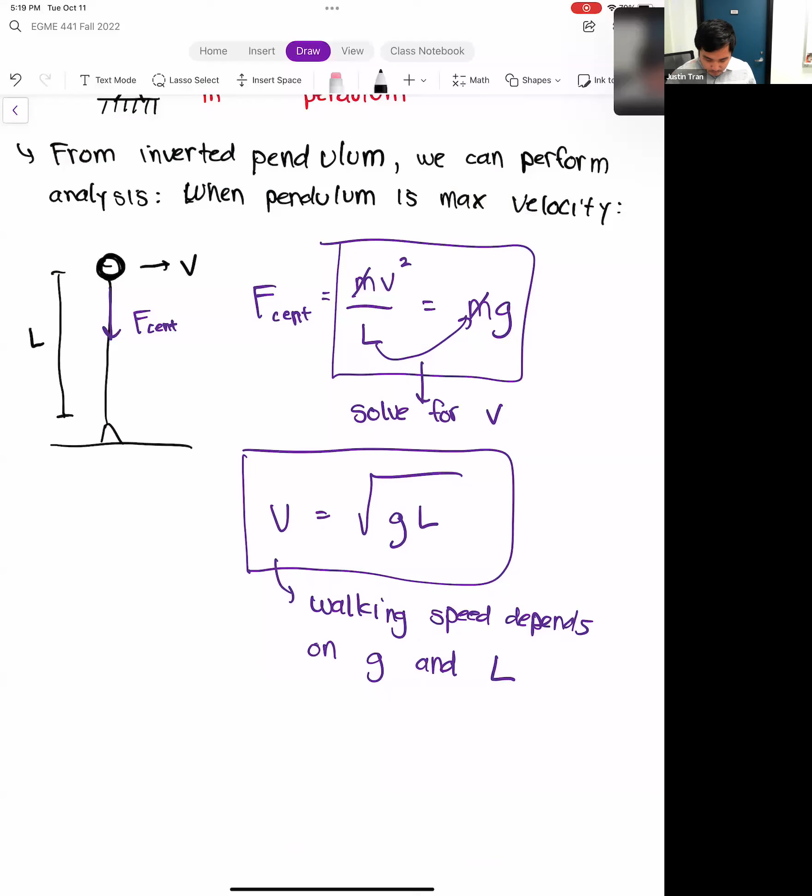Yeah, so these are, I don't mind. It's okay, I really...

You didn't mention it, so I assumed I'd seen it. Did Ricky say it was kind of slacking on you? No, yeah, was Ricky slacking in your group? Straight off, I want to say something about that.

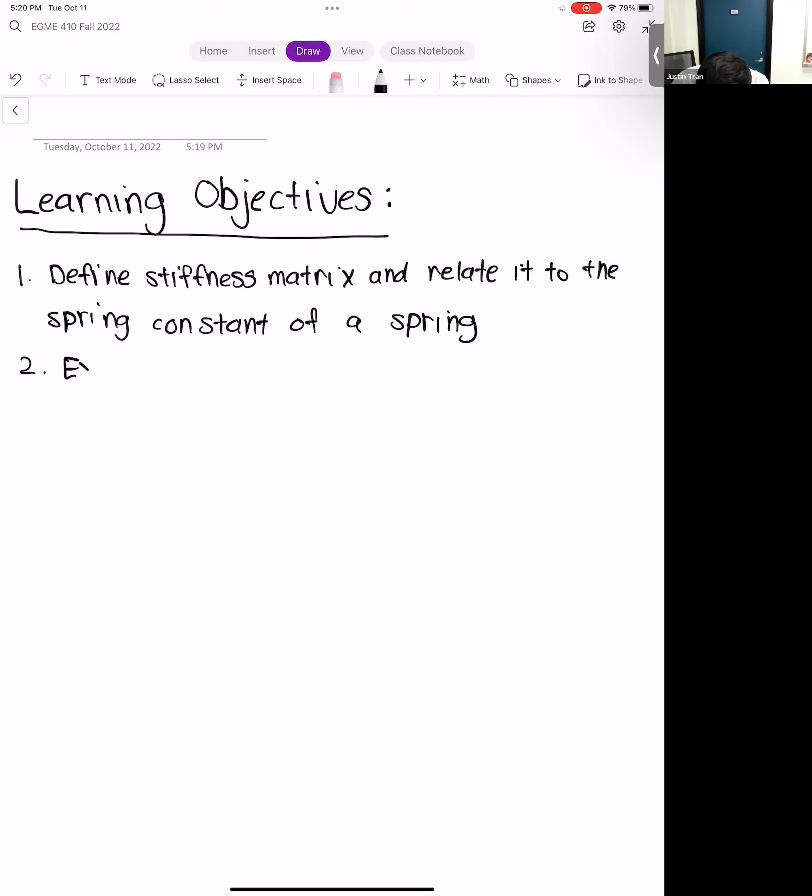Well, you're also in the engineering chat. Ricky and I are kind of... Hey, I wasn't saying that. It's gonna be pretty good, though. You sound kind of sick.

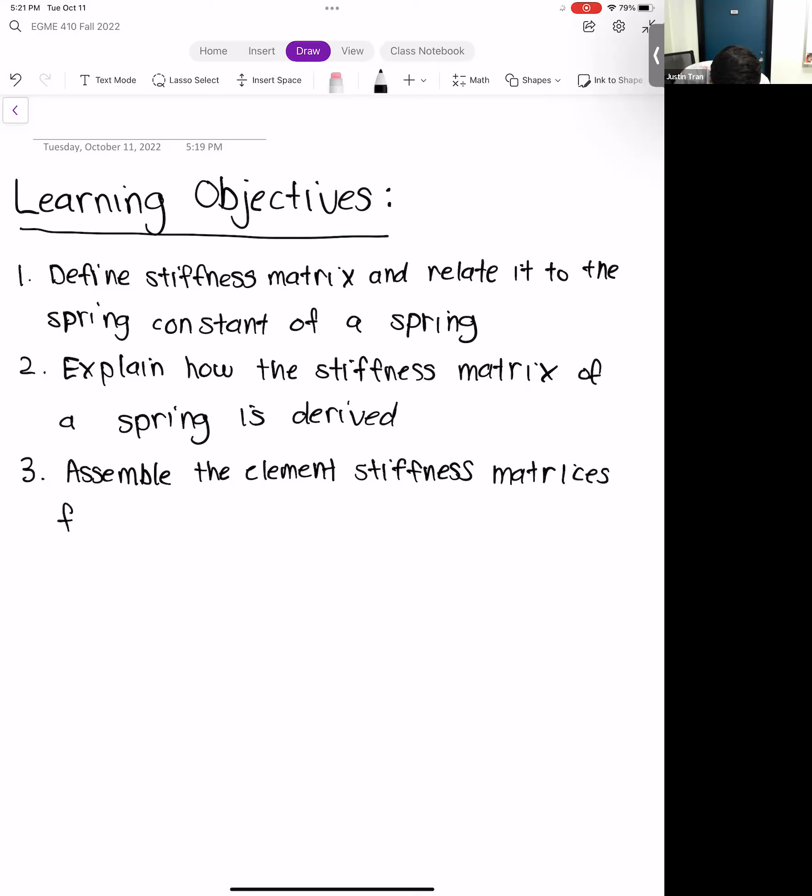Hey Charles, how's it going? Yep, what's up?

So I'm doing an assignment and I don't know where the mistake happened. You want to know the best... was it when he gave the mechanical, or was it when I turned stuff into beams? But I remember connecting the rod. You said we had to connect the rod to the beam, right? Yep, so it's supposed to be like this.

However, I ran my simulation and he was like, alright, I'll give you the extension, and it ended up like this. It looked like the beams just... I'm like, no, what is it? It went into the rod, like halfway through.

Oh okay, if it's just visual, that's fine. Are you seeing the deformation kind of maximize down here and then go like... no, I just generated the mesh, I haven't put any forces on it yet. Okay yeah, if it's just like this, it's just a visual thing.

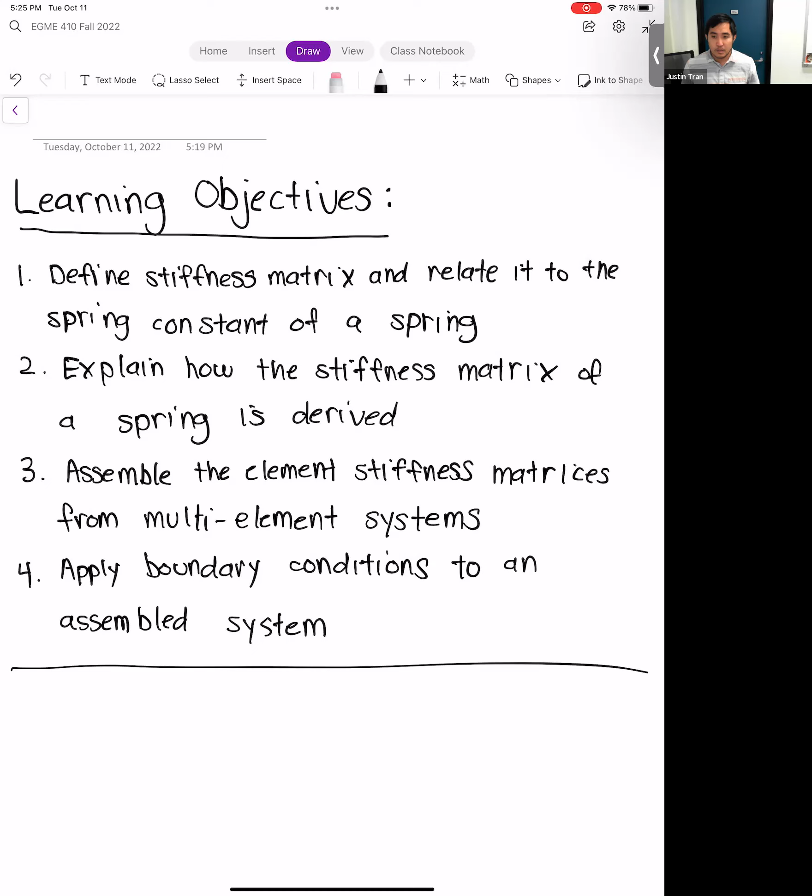That's good, it's good that you're thinking about some real numbers for these.

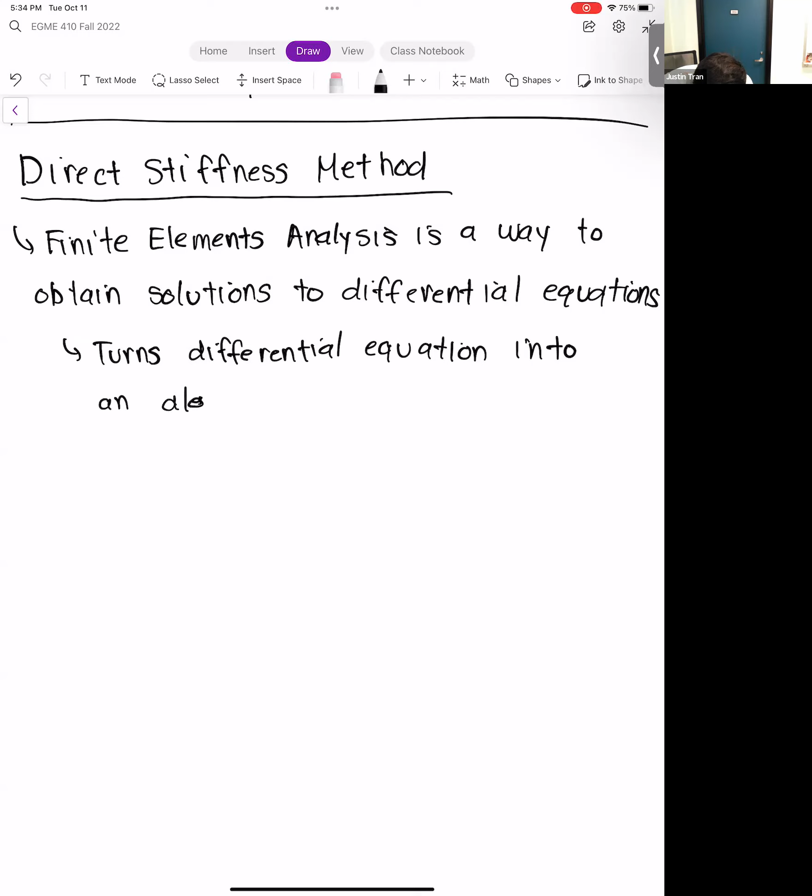At its core, FEA doesn't actually solve the problem for you. All it really does is take one problem and put it in a different form. Finite elements doesn't give you a solution to a differential equation, it just puts it in a much easier form to deal with. So finite elements is just the methodology to go from a differential equation to an algebra problem, and then you solve the algebra problem. Generally it's a lot easier to solve an algebra problem, especially for a computer, than differential equations.

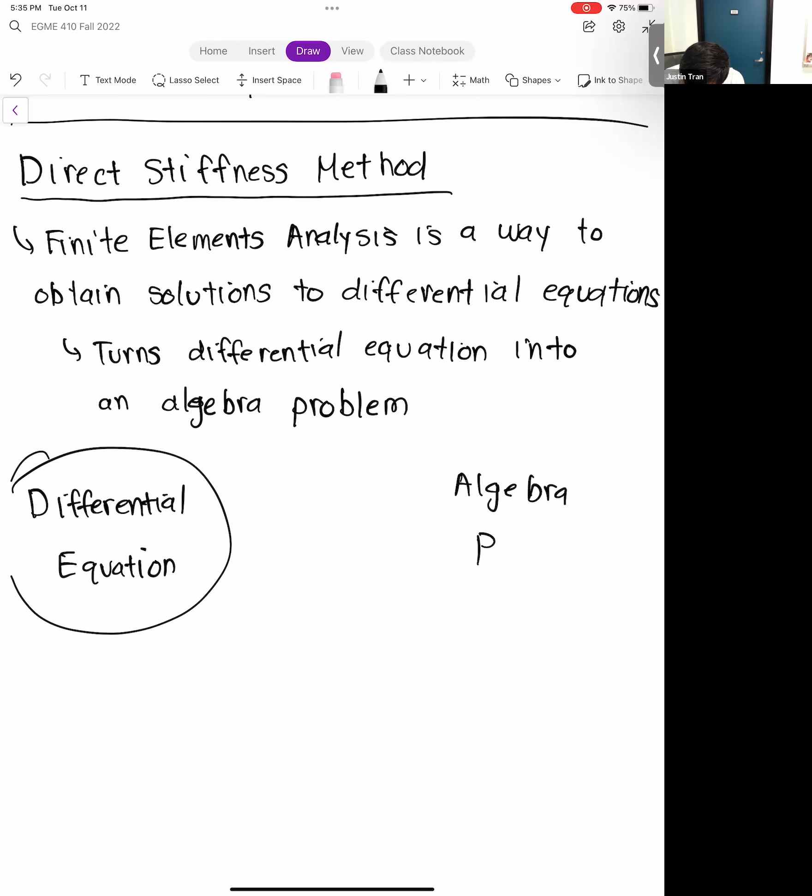Visually, it looks something like this: you start with a differential equation, and then you go to an algebra problem, and in between, that's FEA. Then from the algebra problem, you just solve it. I make that step sound simple because algebra is easier than differential equations, but it can still be really hard. Over the next couple weeks doing the theory, you'll look at the algebra problems we're getting and say that's not easier, that's harder. Algebra is not necessarily easier for a human, but it is a lot easier for a computer. So if you can turn a differential equation into an algebra problem, the computer is much better equipped to handle that.

This FEA step of turning a differential equation into an algebra problem - there's lots of different ways to do this. There's lots of different ways to skin the cat. Even though we talk about FEA as if it's one thing, there are actually lots of different ways you can perform FEA. There are lots of different FEA implementations out there.

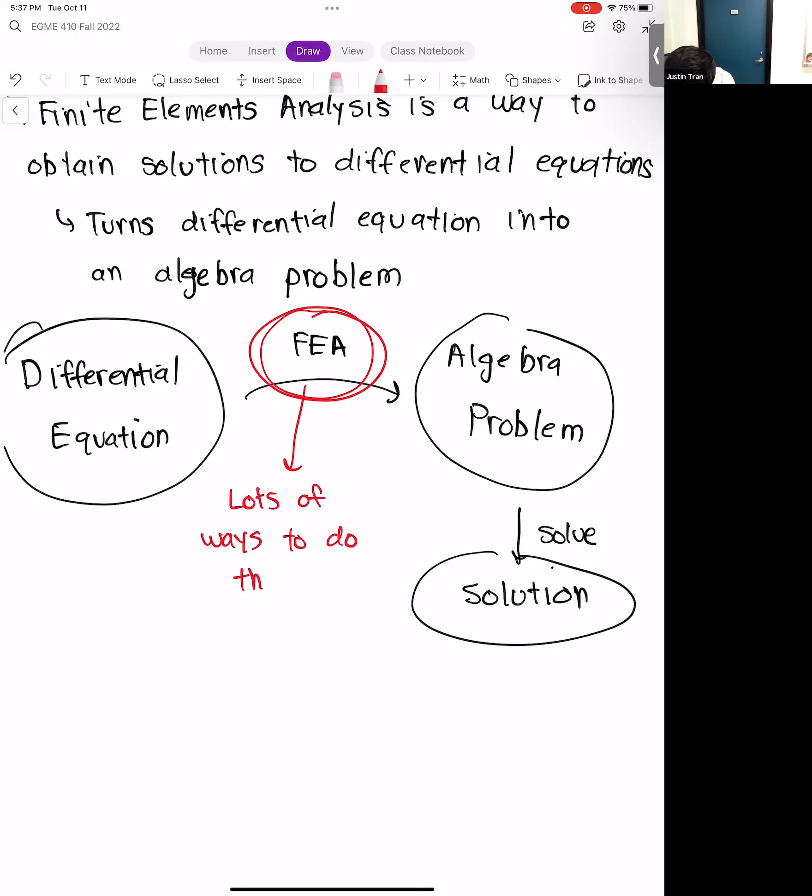The reason I'm bringing that up is that the direct stiffness method I'm going to teach you is not really all that similar to what ANSYS is doing. The direct stiffness method is just one way to perform FEA. It's not very practical for real life problems because it's very simplified. But I teach it because traditionally it's the first method most people learn when learning FEA theory, so it's a lot simpler to digest. Even in its simplicity, it still gives you a lot of good insights into how the finite element process works on a theoretical and algorithmic level.

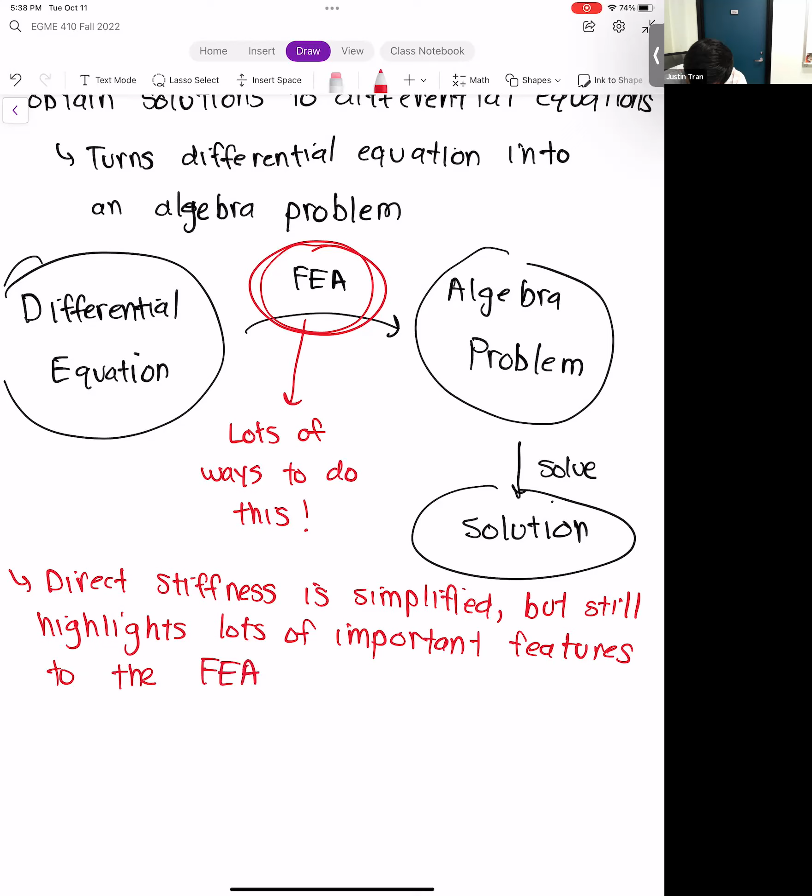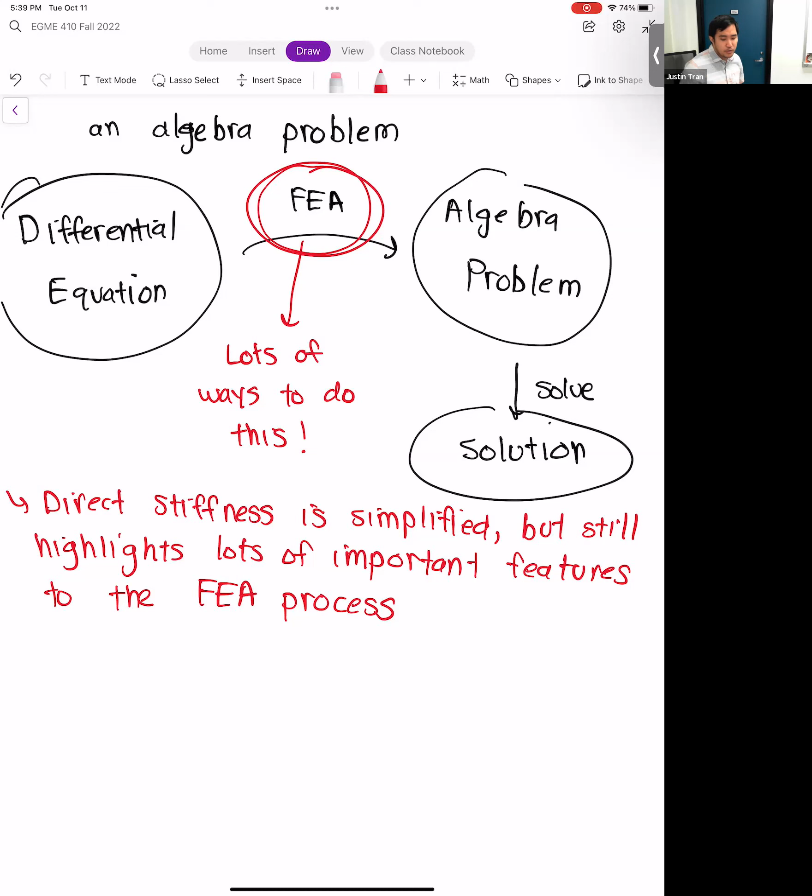I would argue that most of the direct stiffness method is actually the same as normal FEA, like what ANSYS is doing. There's just one key step that's different. Of course, that key step is one that a lot of FEA algorithms are built on, so it's a really important step, but all the other steps are mostly the same. I think I've done enough teasing.

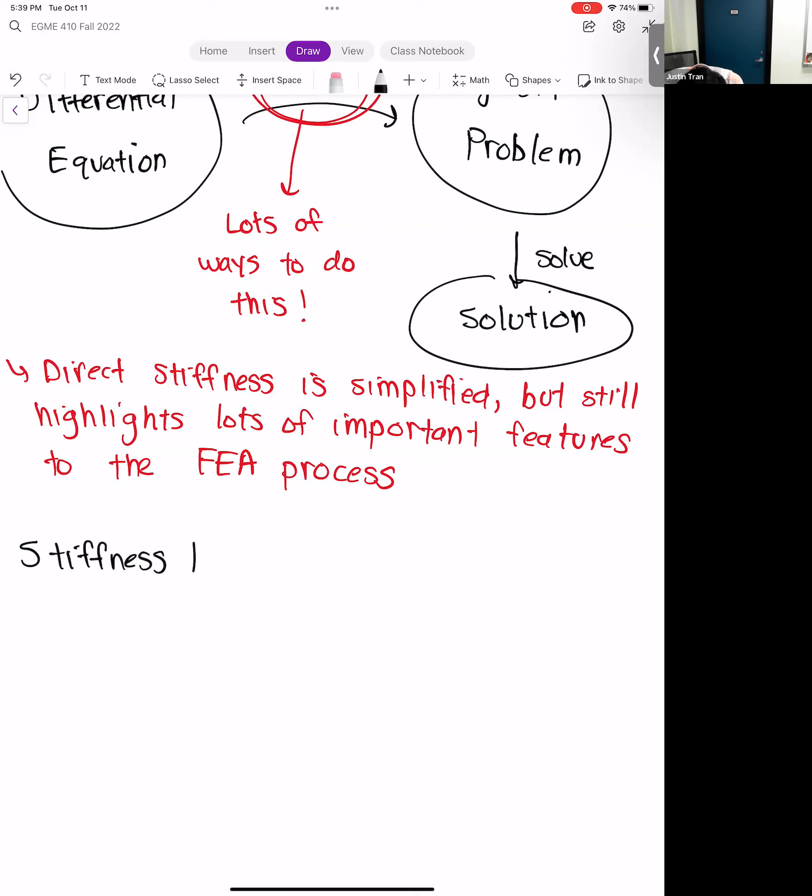Let's talk about what the direct stiffness method is by talking about something called the stiffness matrix. To introduce the stiffness matrix, I'm going to bring up an old friend - hopefully it's an old friend - and that's going to be a simple spring and Hooke's law.

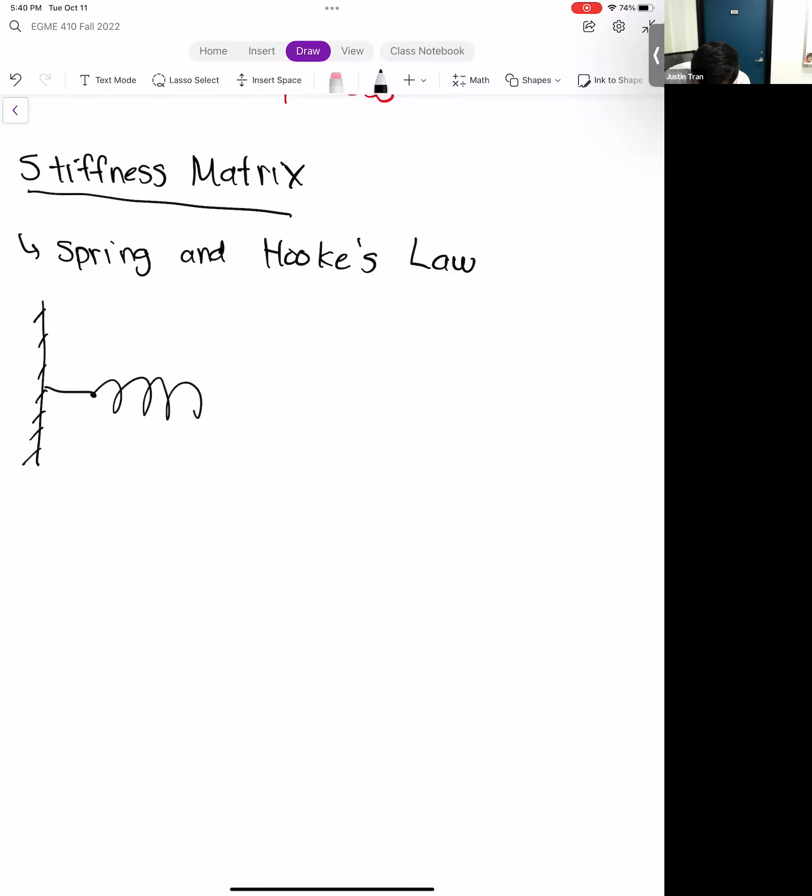Let's consider a simple spring. Here we have a fixed wall, and we have a spring attached to the wall, because why not. Let's say we're going to pull on the spring with the force F. We know the spring has a spring constant K, and the units for K are newtons per meter, at least in SI. That's the spring constant, so that tells us how strong the spring is. The spring also has a default length, L. But when we apply the force F on it, the spring is going to extend. This D here is the amount the spring is stretching in response to the applied force.

From this simple spring, we can form Hooke's law. Hooke's law gives us the mathematical relationship between the amount of force we're applying on the spring, its deformation, and its spring constant. Hooke's law basically says the force F that we apply on the spring - and I'm writing this obnoxiously large so I can draw side notes, but you don't have to draw it as large as me - the force F is equal to the spring constant K multiplied by the deformation.

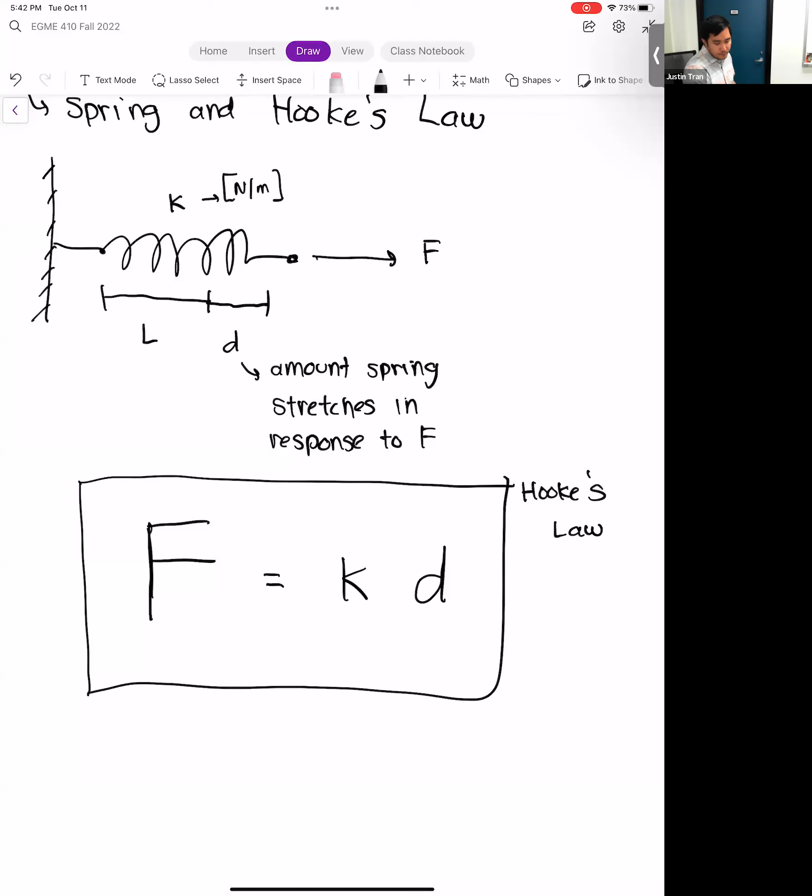So hopefully that's a formula that you're familiar with. It's a very simple formula, right? It's only 3 terms, and we just have a simple multiplication. But believe it or not, this simple formula here kind of forms the basis for how we form FEA

problems, and I'm going to show you kind of what that looks like. So first thing I'm going to do is go term by term here and talk a bit more in depth about what that term represents. First of all, what it represents for the spring, but also how we can generalize that relationship to any other system.

So let's start with the force F here. This force F is what I would consider an external force. It's some kind of external entity that is acting on the spring that's causing it to react.

That force F is not produced by the spring itself. It's either some external device, external person, or external thing. So that F has to be from external. And what you'll notice is that the F is kind of sitting on one side of the equation all by itself. We have the equal sign, and everything else in the system is on the right, but the F is kind of chilling by itself on the left. And that's going to be an important point that we'll come back to a bit later too.

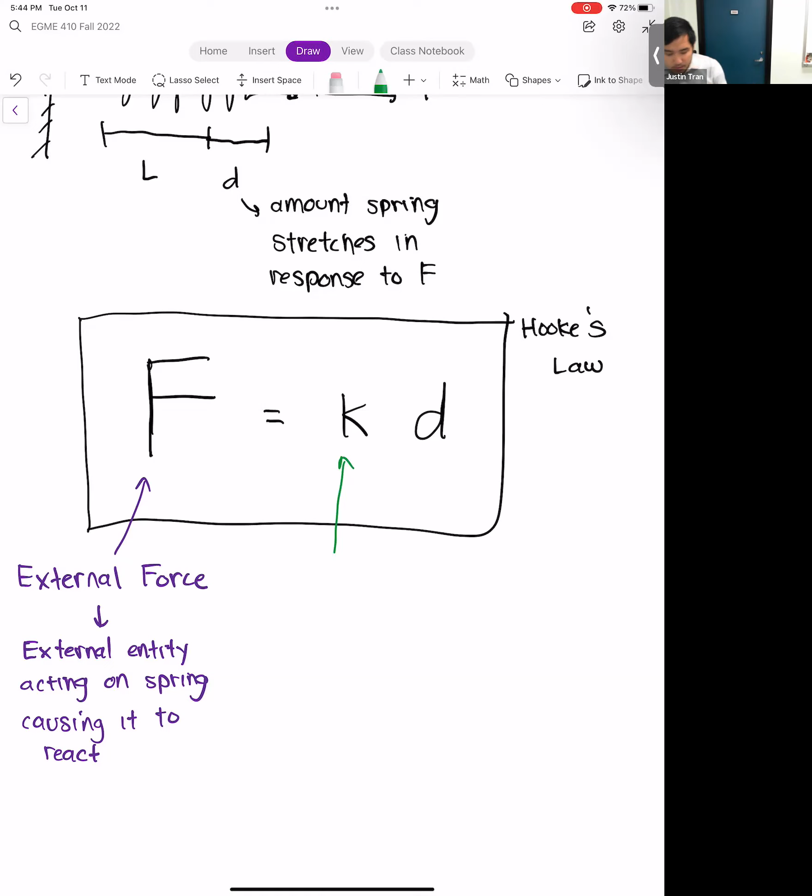Next we have K. Of course, K here is the spring constant for the spring. And the spring constant is something that I would characterize as a material property or material constant of the subject.

We know that if we're looking at a spring, the higher the spring constant is, the more it's going to resist deformation. So a spring with a very high spring constant is going to resist it a lot, and springs with a low spring constant will just kind of be like a slinky, basically. In other words, the value of this property basically defines how the system is going to react to the external factors.

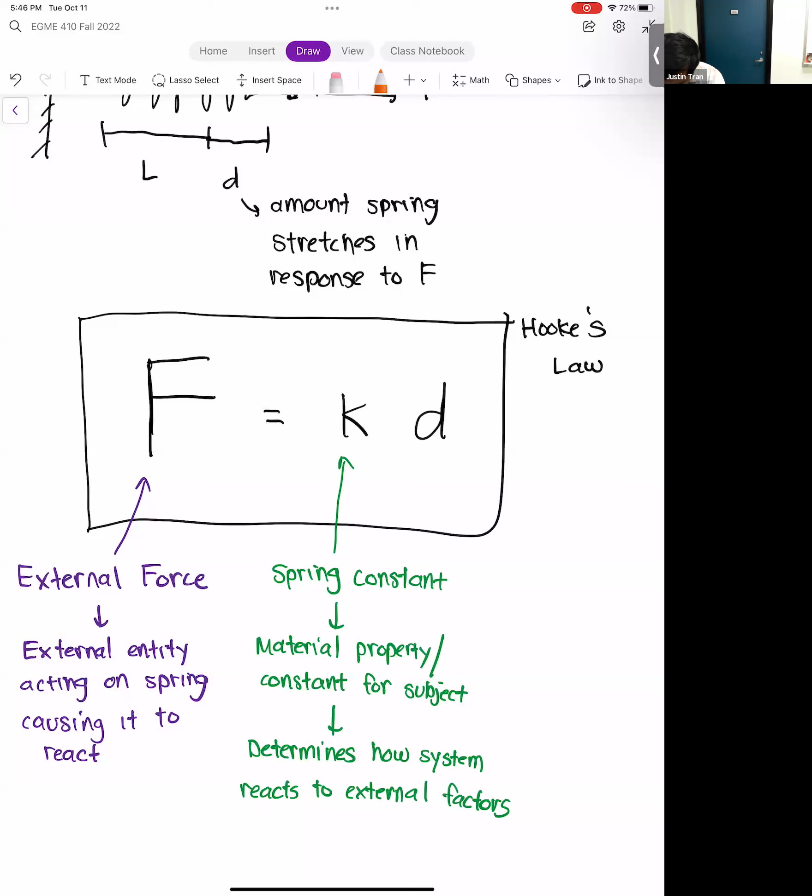And then finally we have D. D, of course, is the amount that the spring is deforming.

Another way that we can view this D here, if we extrapolate and look more broadly, is this is the system's response to the external force. So if the spring constant is the material property that determines how the system will react, the D there is the actual response.

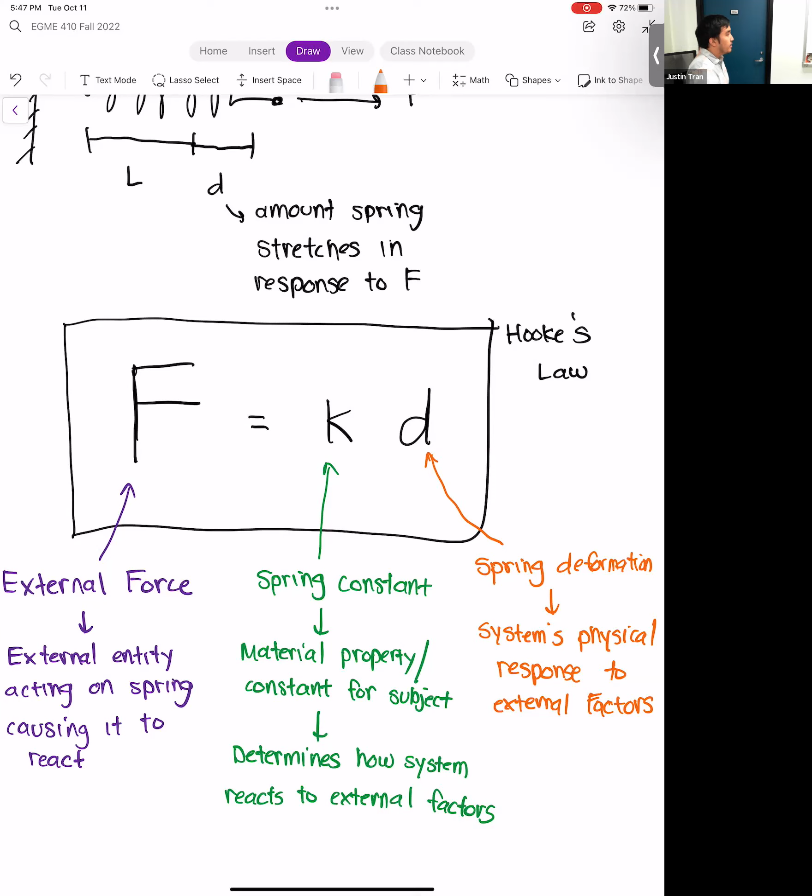Because anytime you have any kind of external effect on a system, then it's going to react in a certain way. So the D there kind of characterizes the response.

And so, even though we have a simple equation here, there's kind of a lot of really rich information that we can pull from it. If you notice, a lot of how I've been describing these terms are kind of consistent with how we've been describing a lot of our finite element stuff. For instance, the force F here, we know that's some kind of external effect or external force. So what's the concept in ANSYS that we've been looking at that acts as an external force? Right, these are like our boundary conditions.

Next, let's look at K. I said K there, it's already in the name - I already said it's like a material property or material constant. We know from our ANSYS activities that constants like the Young's modulus, like the density, those are going to affect the response. So these are just like the material properties.

Another thing I'm going to throw in here because it's relevant to our discussion is the geometry as well. A spring doesn't have any geometrical properties, but for other FEA, the geometry is going to be there. The size, the area, the lengths, and stuff like that of your system is going to have basically the same effect as K.

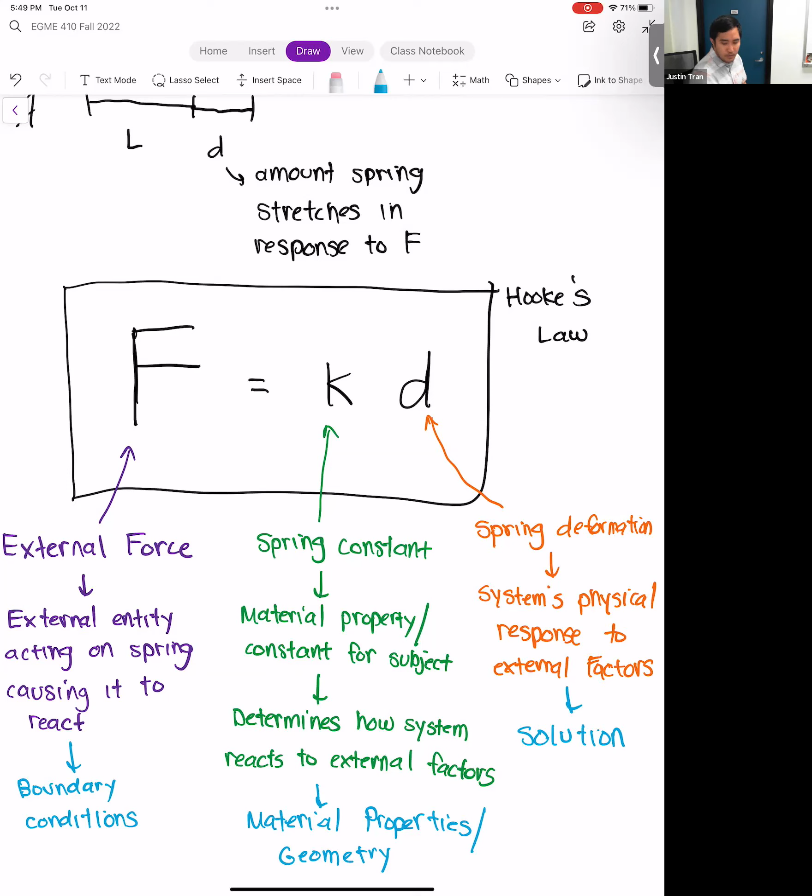We have a very simple Hooke's law equation here, three terms, but there are so many parallels to how we understand finite elements. This system is actually going to be the basis of our theory. In particular, we're going to focus on this K right here. One way to think of it is that it's kind of like the stiffness constant of the spring. But when you extrapolate this and apply it to a finite element mesh with tons of different nodes, instead of a constant, what you're going to have instead is a matrix.

That's going to be the focus of a lot of our theory: what the stiffness matrix is, what it represents, and how we actually use this in computations. As we go through the theory over the next couple of weeks, we'll see a lot of different expressions for stiffness matrices for different types of structures. One constant you'll see is that the stiffness matrix always contains things like material and geometric properties of the system.

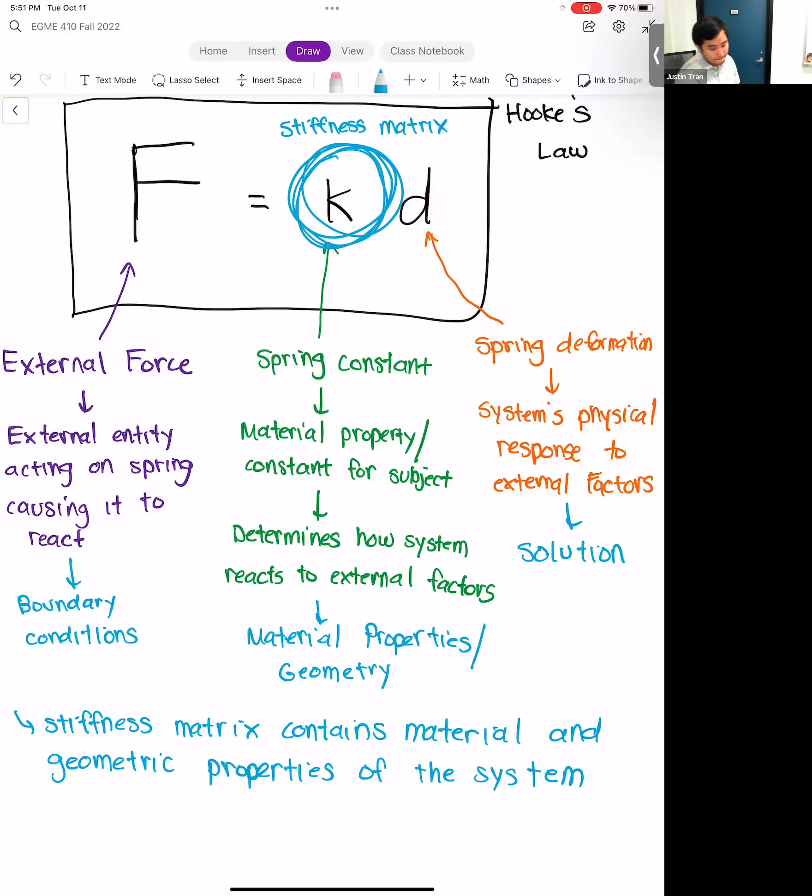This structure here is not just limited to structural mechanics. If you look at FEA for heat transfer or FEA for fluids, you have the exact same structure: external effects, important material parameters, and the response, except the specific values of these change. For heat transfer, the response is temperature, and the material constant is things like thermal conductivity and thermal diffusivity. But the same idea stands: the external force equals material constants multiplied by the response. This basic structure is used for basically all of finite elements.

Any questions on this?

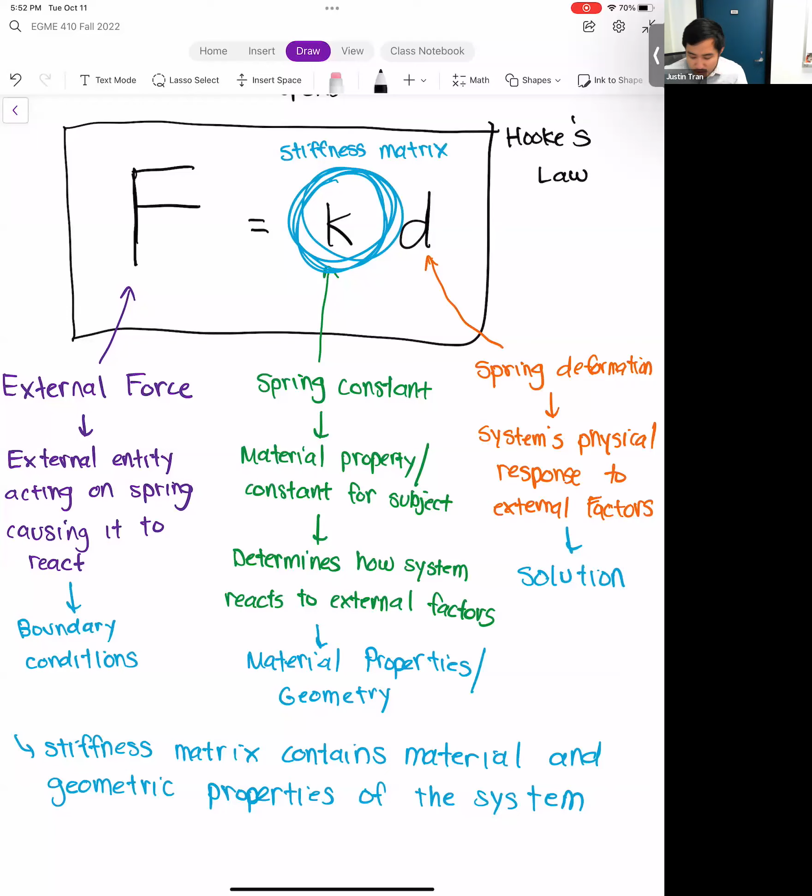Let's take the structure here and apply it to the spring, and let's see if we can get the stiffness matrix for a spring. A matrix implies that if K is a matrix, then in order for that relationship to hold, the F and D terms have to be vectors.

Particularly, we're going to look at a spring and consider the two edges of the spring. We're going to consider one side like this, F1, F2, with node 1 on the left and node 2 on the right. In response, we're going to look at their corresponding deformation, so we have D1, D2. What we want is an algebraic relationship that relates F1 and F2 to D1 and D2.

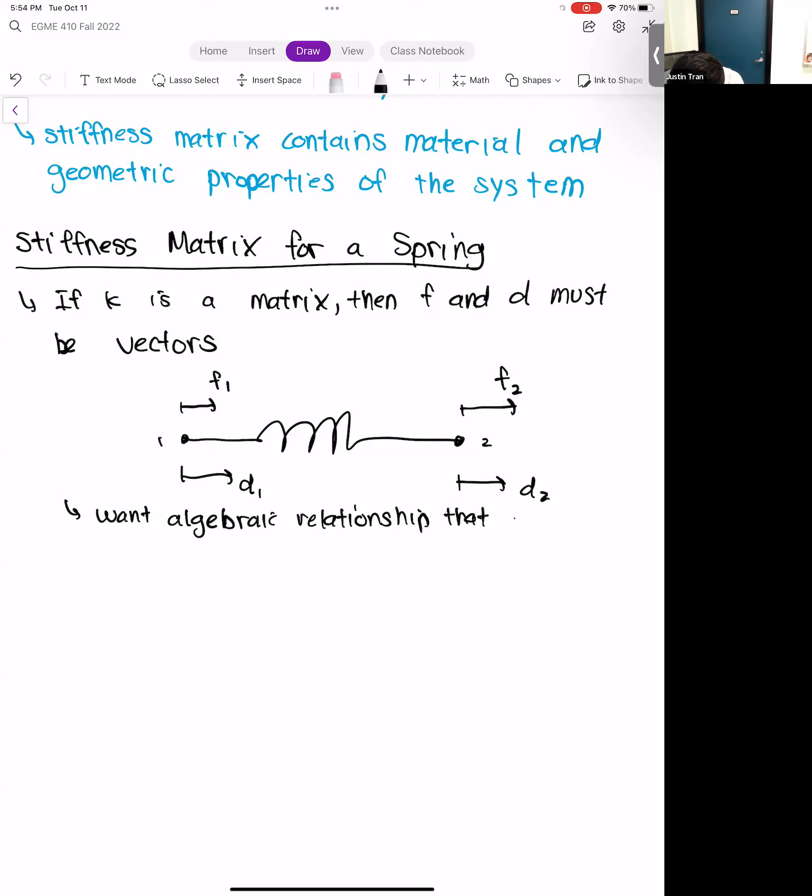The spring has a spring constant of K. Using that same structure we had above, if we isolate the forces on the left-hand side, we have F1, F2 as a vector, and this is going to be related to D1, D2, which is also a vector. In order to make this algebraically sound, our stiffness matrix here needs to be 2 by 2, so we need to have K11, K12, K21, K22. This is a very simple stiffness matrix or stiffness system for a spring. What we're aiming for is to find the values of this stiffness matrix.

Okay, so let's go ahead and begin. The first thing we're going to assume here, just for simplicity's sake, is that our spring is in static equilibrium.

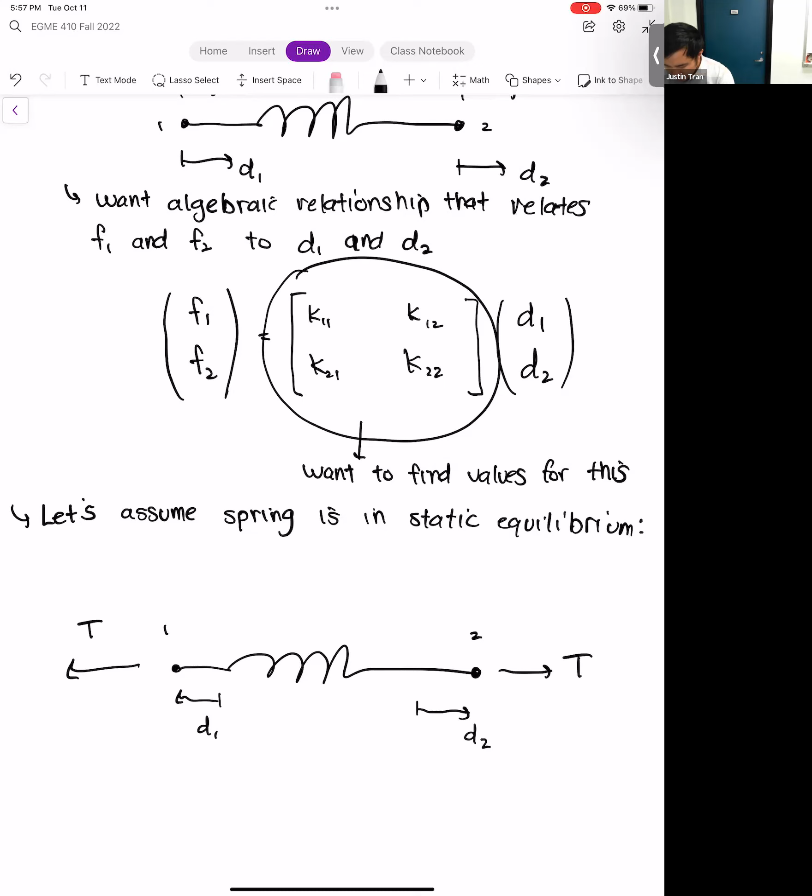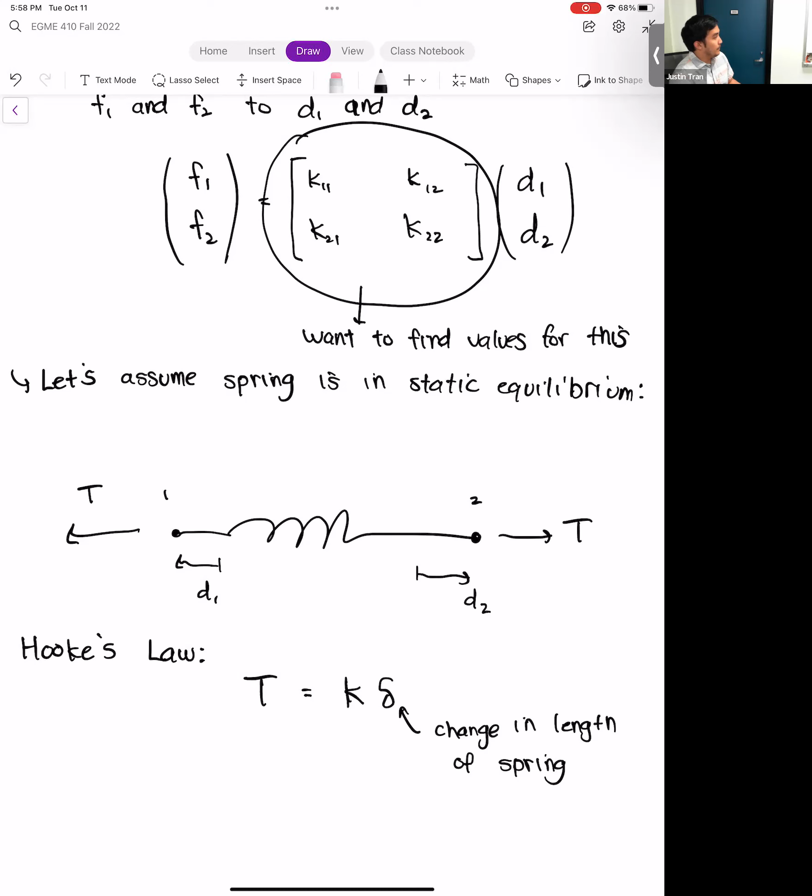So let's form Hooke's law for the spring. Hooke's law basically says that the force we apply on the spring, which is T, is equal to the spring constant multiplied by its deformation. Its deformation here is going to be its change in length, delta, which is going to be the change in length of the spring. So that's just straight up Hooke's law on its own.

First, I'm going to take that term delta and put it in terms of the nodal displacements, because we don't have delta in our figure, but we do have our D1 and D2. So I'm going to replace this. We have T, which is equal to K. One way we can compute the change in length is we just take the difference between D1 and D2, because we know D2 is deforming to the right, or node 2 is deforming to the right, and node 1 is deforming to the left. So if we take the difference between those deformations, that's going to be the change in length. So this is going to be K times D2 minus D1.

So we have this relationship here where the tensile force on the spring has to equal the spring constant times D2 minus D1.

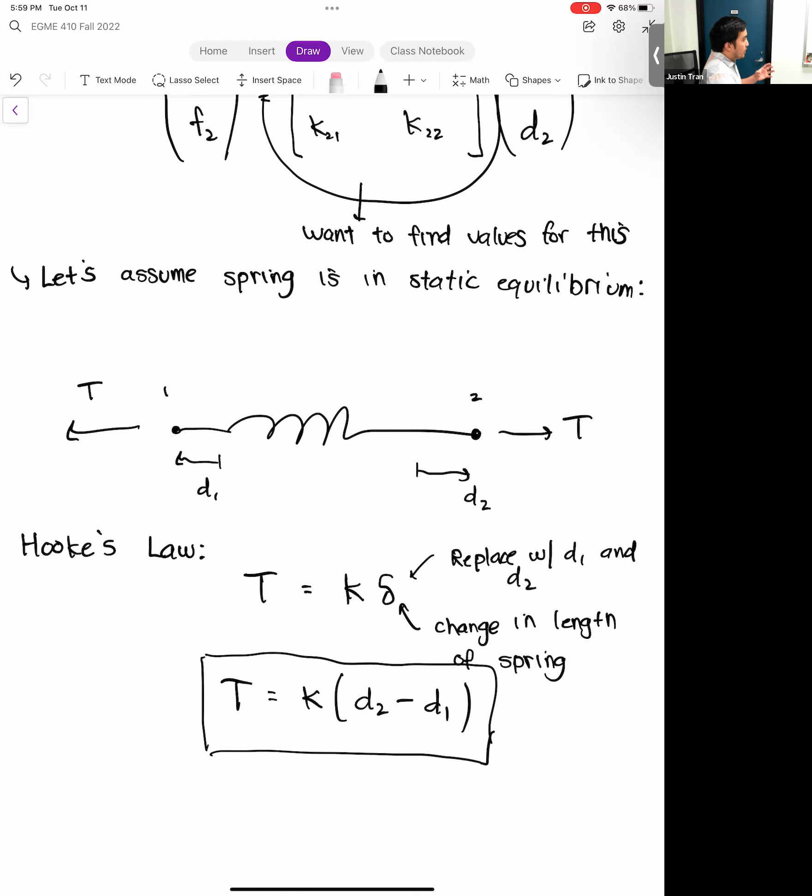Now that we have this expression that relates the tension to D1, D2, let's relate the tension T to F1, F2.

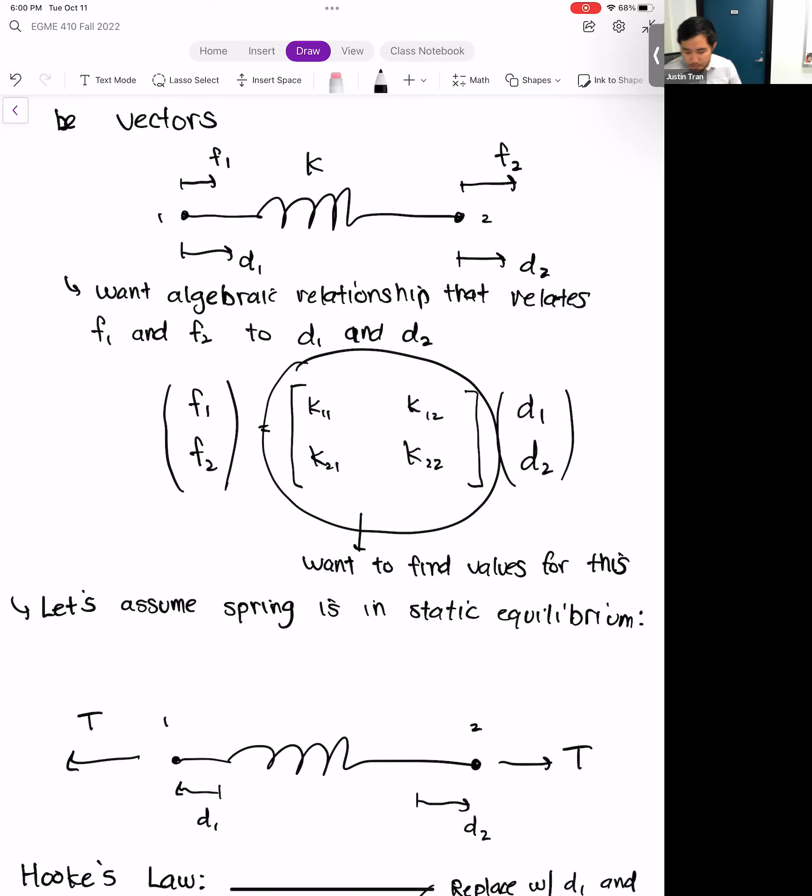By F1, F2, what I mean are the external forces being applied on node 1, node 2. If we go back to our first figure, we can see that F1 is acting on node 1 pointing to the right, and F2 is acting on node 2 pointing to the right as well. If we compare this figure to this one, we have tensile forces T acting on nodes 1 and 2, so we can make a relationship between F1, F2, and T.

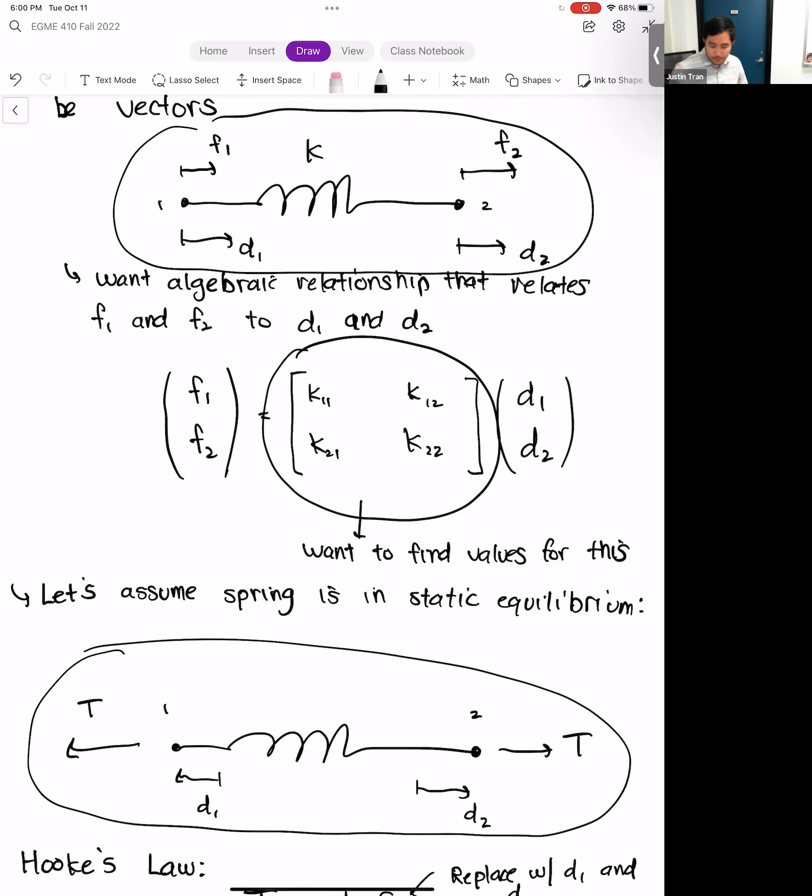In particular, we have this relationship: F1 is equal to minus T, because at node 1 we have the tensile force pointing to the left, which is the negative direction. So F1 is equal to minus T. And F2 here is going to equal positive T, because on node 2 we have the tensile force T pointing to the right, which is the positive direction.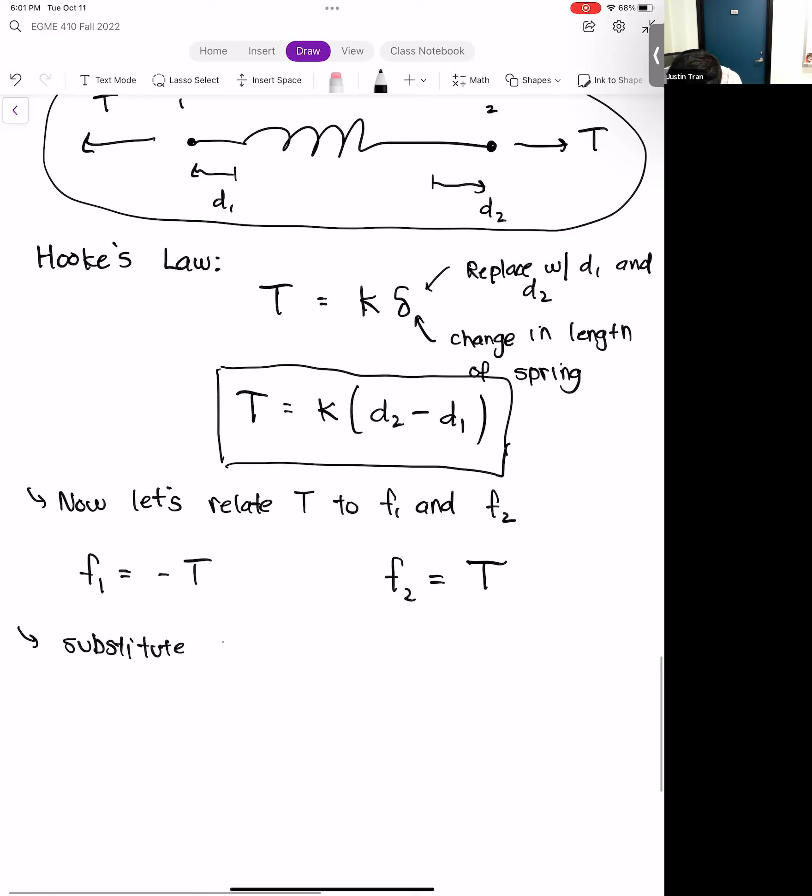The next step is we can take these expressions and substitute for T. We know F1 is minus T, so F1 is equal to minus K times D2 minus D1, and F2 is equal just to T, so that's equal to K times D2 minus D1. Just for simplicity's sake, I'm going to distribute the negative for F1, so it's going to be K times D1 minus D2.

And so in the end, we have two equations here: F1 is equal to K times D1 minus D2, and F2 is equal to K times D2 minus D1.

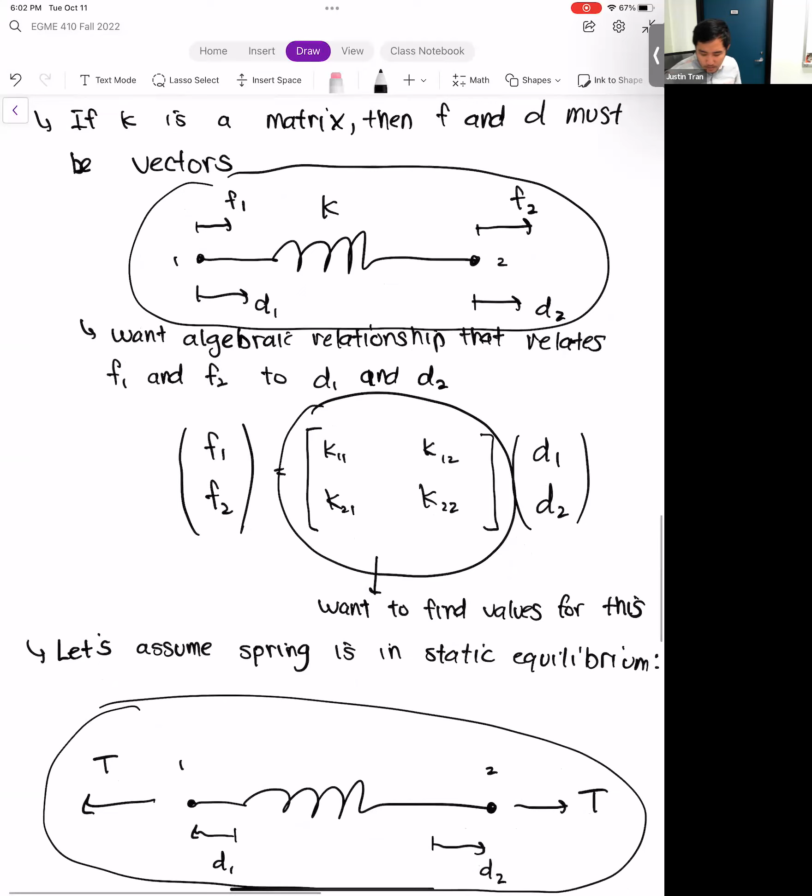So these two equations are significant because remember what we were looking for when we first started this section. We wanted a system of equations that related F1 and F2 to D1, D2. And look what we have here—we have two equations and they provide the relationships exactly as we want.

So we have F1 is equal to K times D1 minus D2. And then we have F2 is equal to K times D2 minus D1. We have two equations that form this relationship for us.

And so the last step I can do here is put this in matrix form. In other words, I'm going to form a vector here. So we have F1, F2. This is equal to a matrix multiplied by the D1, D2 vector.

The last thing we need to do is fill in the entries of that matrix based on the two equations we have above. If we look at the two equations, we know the coefficient for this part is going to be a positive K. The coefficient in the upper right is going to be minus K, and the bottom left is going to be a minus K. And then the bottom right is going to be a positive K. So what we have here is the stiffness system for a two-node spring.

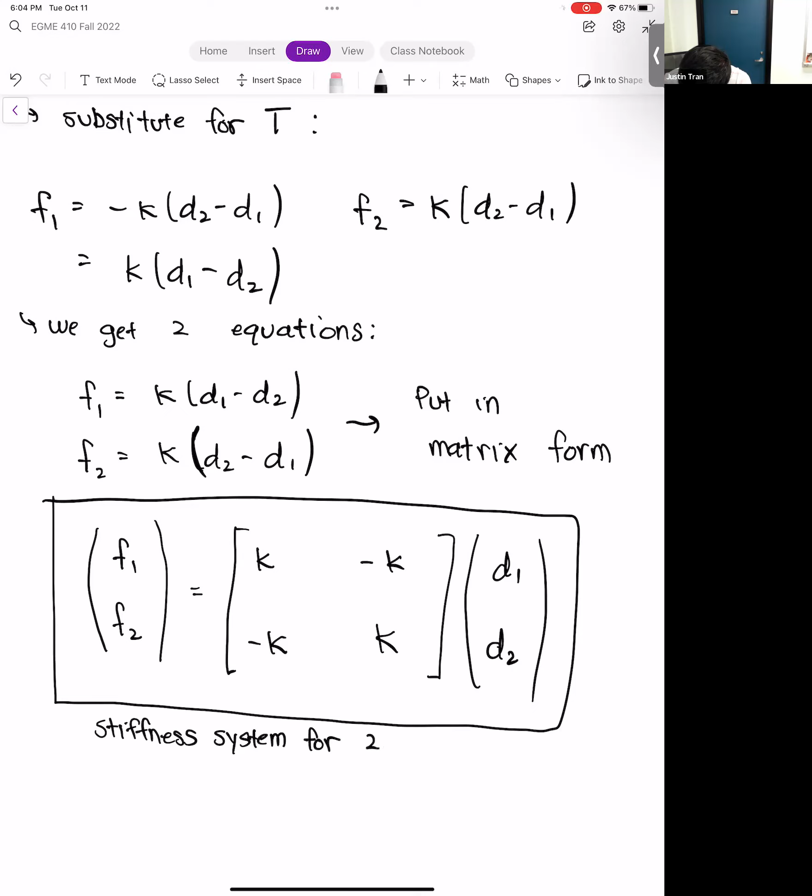In particular, I'm going to pull out this guy right here. So what we have here is K, a matrix of K, minus K, minus K, K. And what we call this right here is the element stiffness matrix for a spring element.

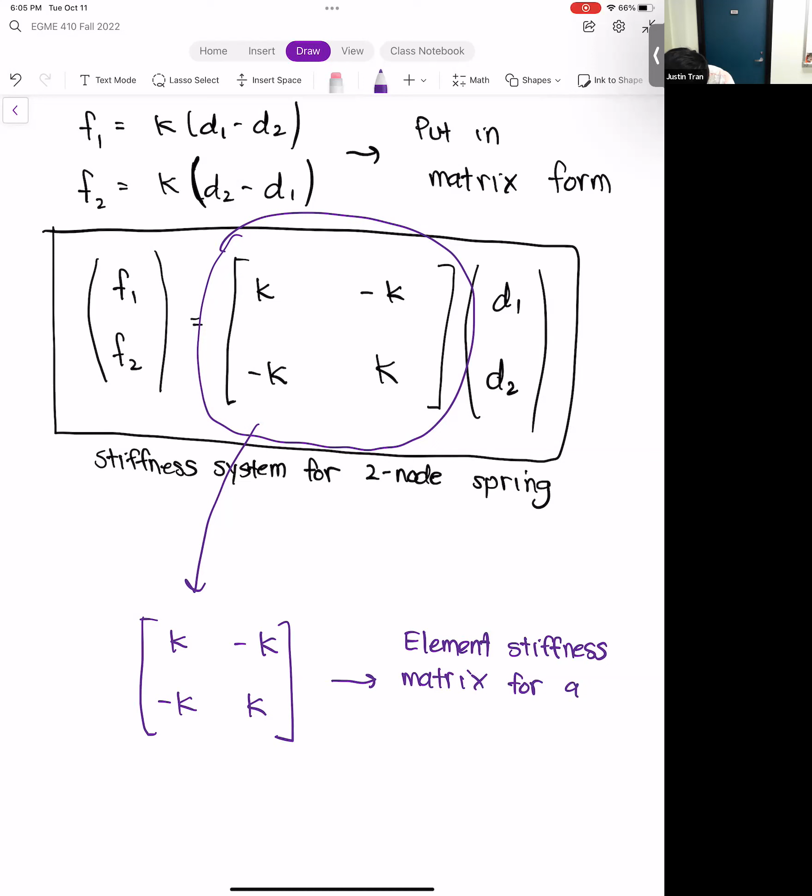So anytime that we have a spring, we can relate the external forces acting on the spring to the nodal deformations using this matrix right here.

Anytime that you have an element—and I use that term very deliberately—an element here is very analogous to an element that you have in ANSYS or any FEA. Every element in every kind of mesh is going to have an element stiffness matrix associated with it. And so this is probably the simplest element stiffness matrix known to man. You can't really get much simpler than this.

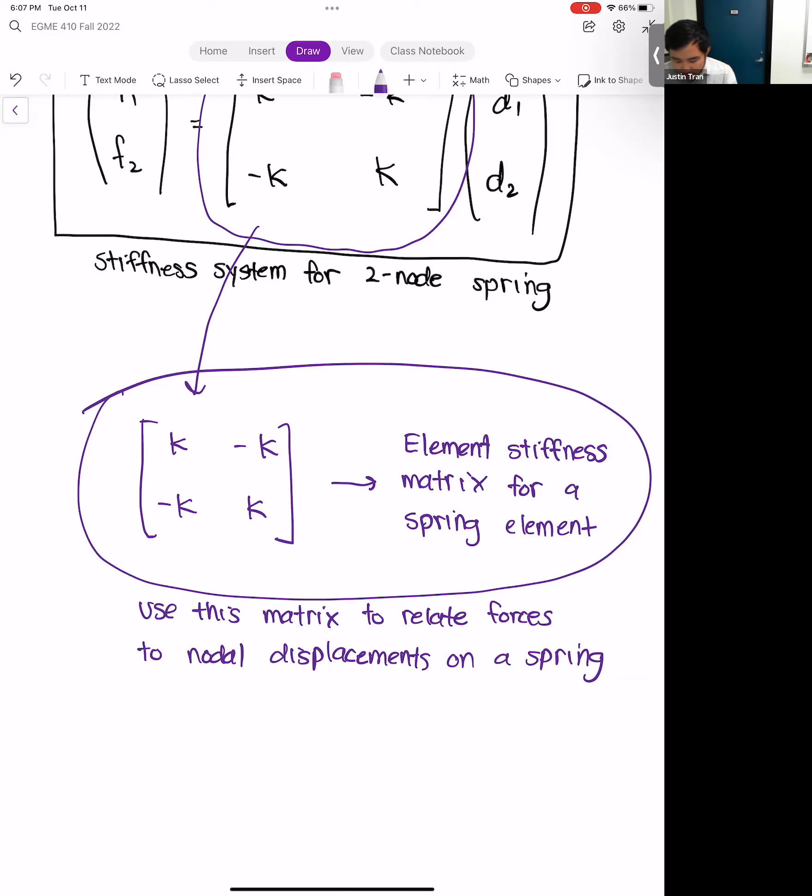All right, so we've looked at one element here and the element stiffness matrix for that, but the real power of FEA and this methodology in general is for multiple elements. Let's see how we actually deal with a multi-element system.

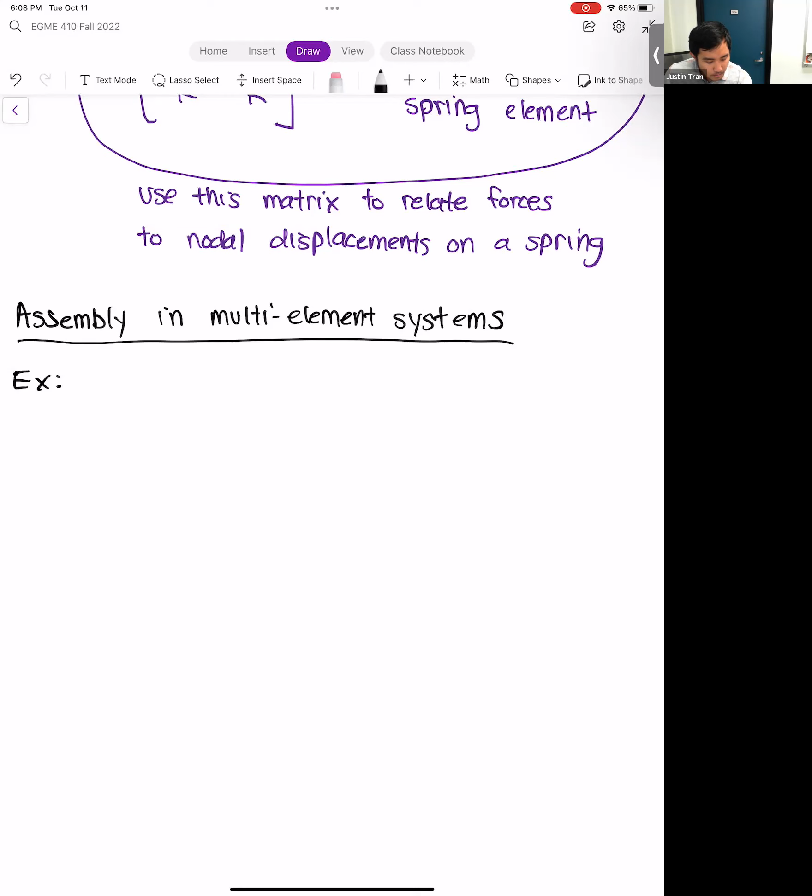I don't have it listed as an example, but this is basically going to be a long example. So let's consider two springs that are attached in series.

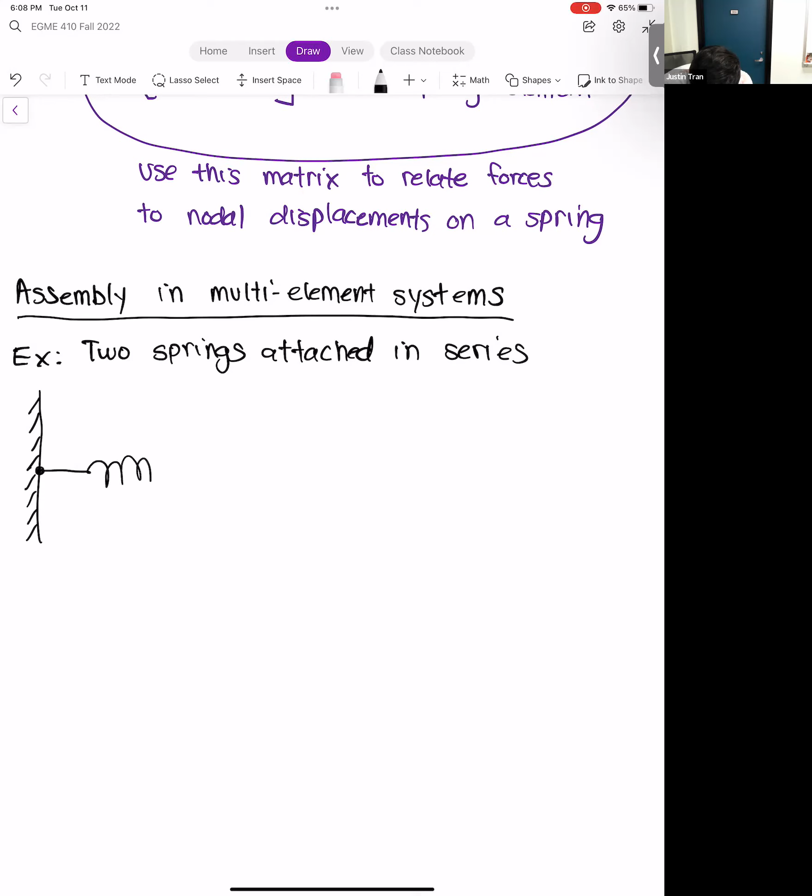We don't have to make any assumptions on the springs themselves, so we can assume they have different spring constants. The first spring has a constant Ka and the second spring has a spring constant Kb. We can label the nodes: in between the springs we're going to have the nodes of our system, and going from left to right we have node 1, then node 2, and node 3.

And then, of course, at each of the nodes we can compute the deformations of those nodes. The way we're going to track the system and solve it is by computing the deformations at each of those nodes: D1, D2, and D3.

Acting on this entire system is going to be an external force F—that's going to be our boundary condition, and you'll see how that F is factored into the equation later on. So what we want to do for this system is compute all the nodal deformations in the system: D1, D2, and D3.

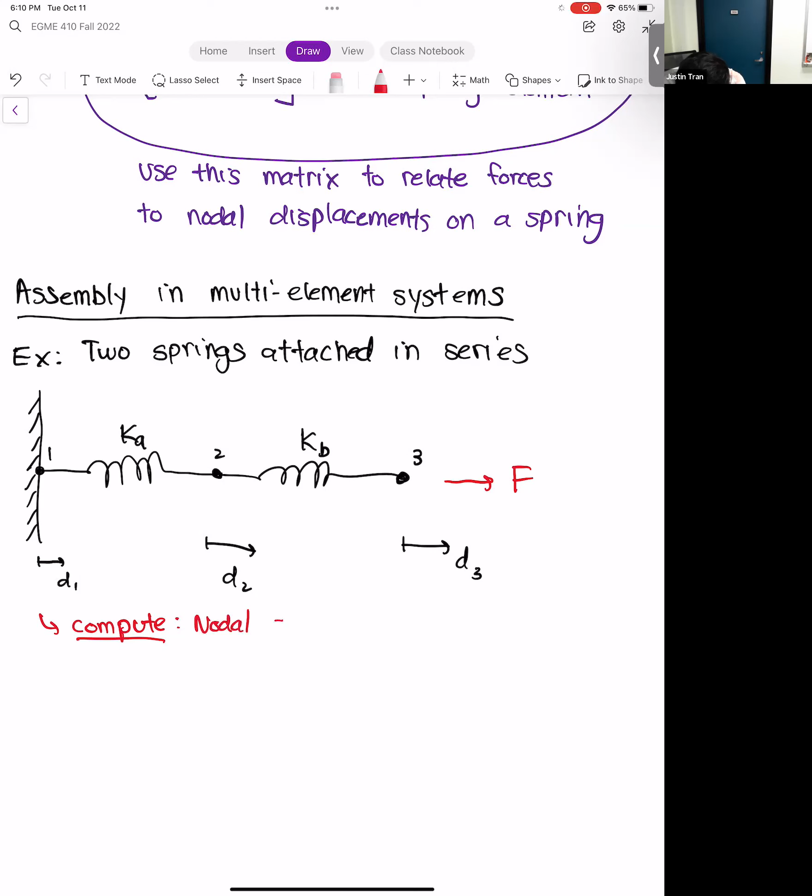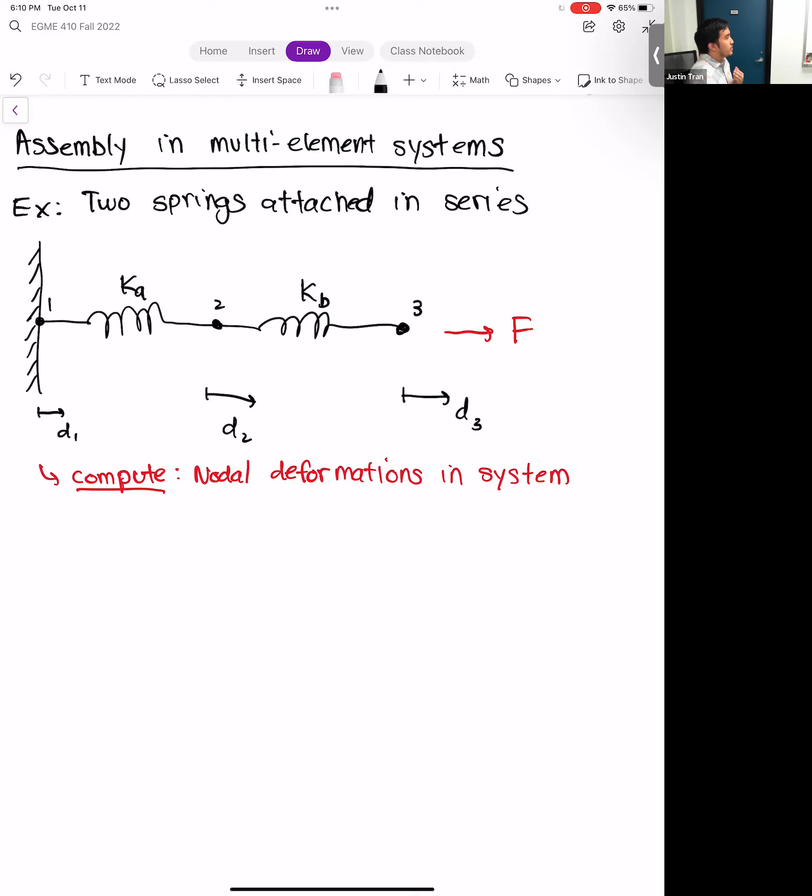So I've shown this problem a couple of years now, and some people have said they've learned how to do this in a different way in another class, and that's great. I'm not here to trash on anyone's teaching, only my own. What I'm going to show you here is the finite element way to do this, and it's going to utilize basically everything we've talked about today up to this point.

We're going to utilize element stiffness matrices, and we're going to form them for both element A and element B. And then we're going to see how we can actually combine them.

The first step to solving a multi-element system like this is to form the element stiffness matrices for all the elements in the system.

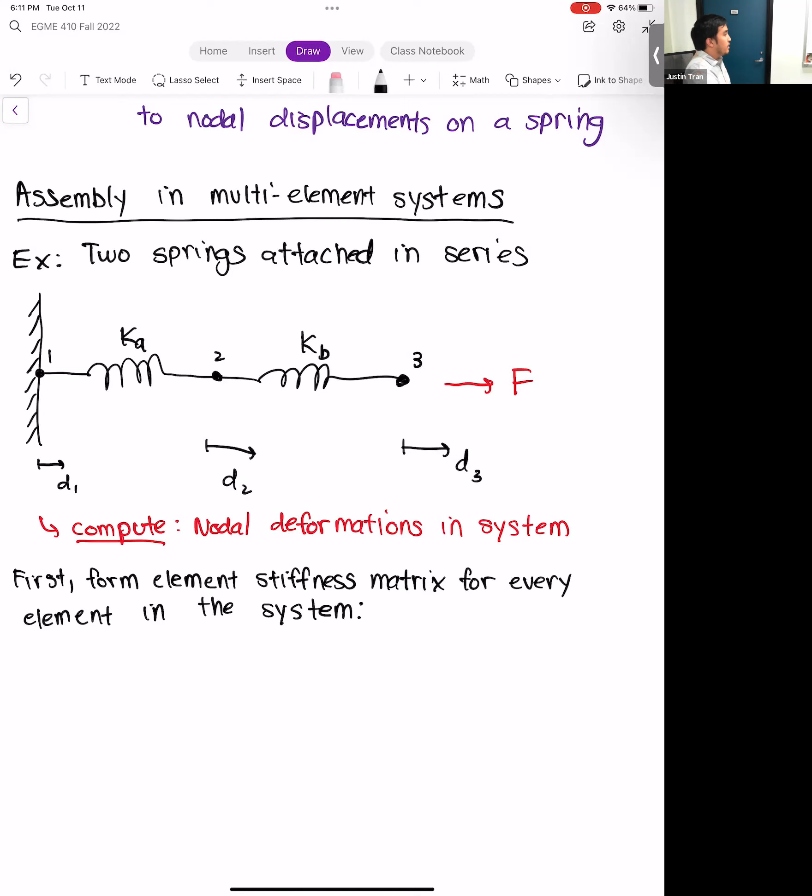Here we only have two elements, A and B, so we only have two element stiffness matrices. Let's start with element A. The element A stiffness matrix is going to follow the exact same format as before. Since the stiffness constant for element A is Ka, we're going to have Ka, minus Ka, minus Ka, and Ka.

And then for B, the element stiffness matrix is going to be Kb, minus Kb, minus Kb, and Kb. Of course, if you had numbers for this you could plug them in, but we don't have numbers, so we're just going to leave it in its symbolic form.

I'm going to do one more step here, and that's to identify which nodes each of these elements are attached to. If you notice, element A is connected to nodes 1 and 2, whereas element B is connected to nodes 2 and 3. That's actually going to be important information, especially in the next step, so we want to make sure that we identify that. The way we're going to do that is by making it part of the system.

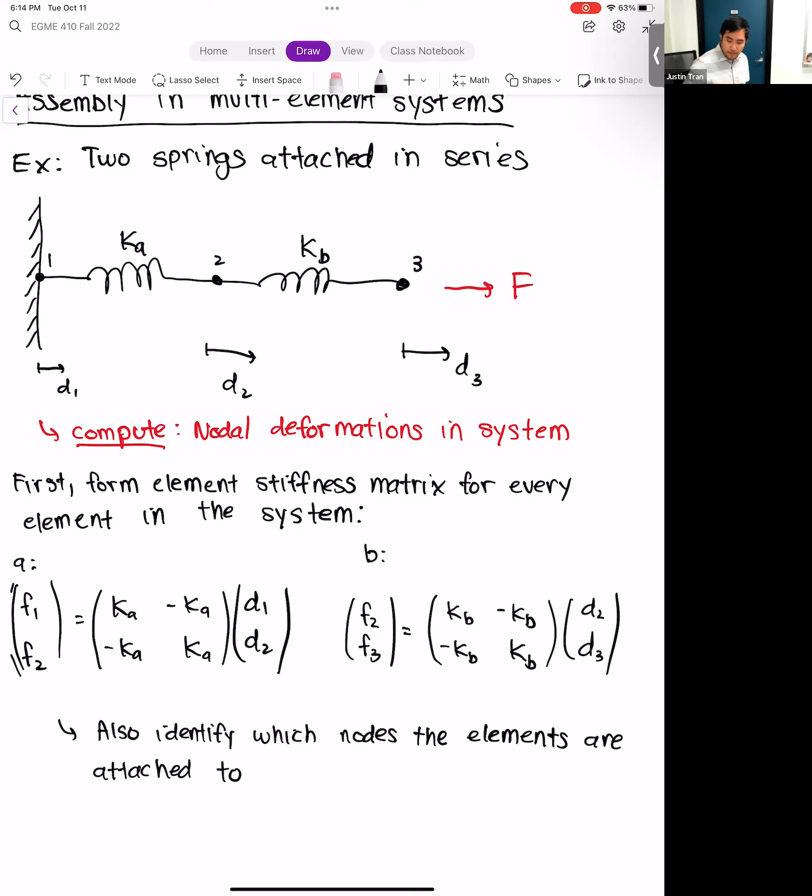That's an important step, so I kind of highlighted it, because I think when you're first starting out, people are so concentrated on just computing the element stiffness matrices that they forget to actually identify which nodes they're acting on. So you want to make sure that you do that here.

Once you've computed the element stiffness matrices for every element, the next step is what I call assembly. This step is called assembly because right now we have two linear systems, a linear system for element A and a linear system for element B. Right now it's not really that helpful because we can't actually use that to solve for a solution. To get a solution from this, we need to get a single linear system. This single linear system is going to combine all of the forces and the displacements for all the nodes.

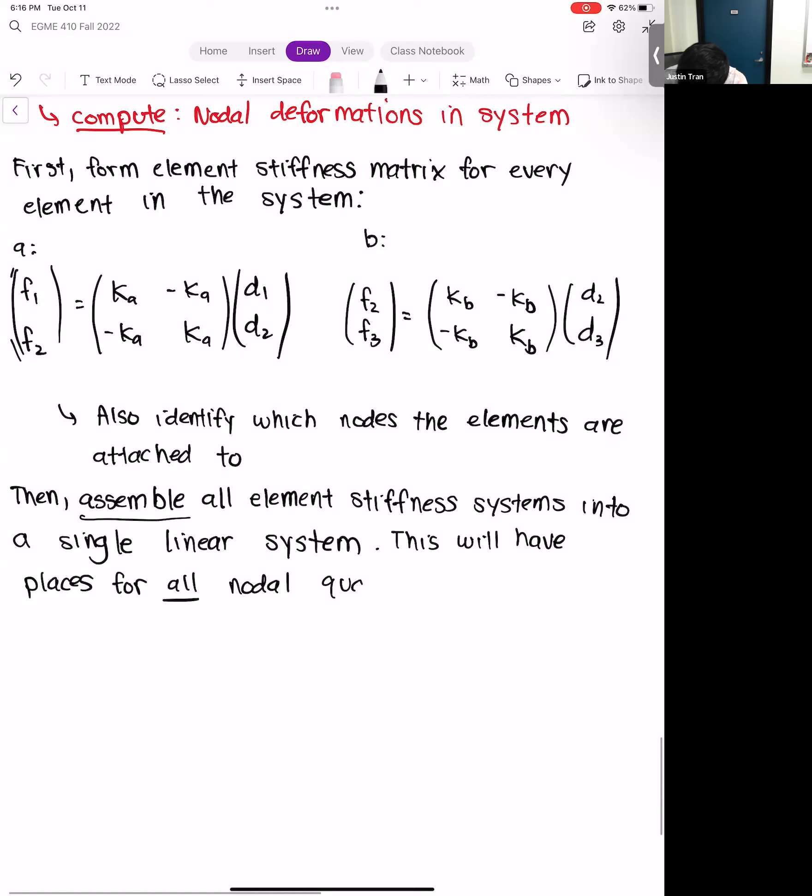For this spring system, we have three nodes. I call it the global linear system, and the global linear system will have three rows, so we have F1, F2, F3. We're going to have a large stiffness matrix here, and then we have the nodal displacements D1, D2, and D3.

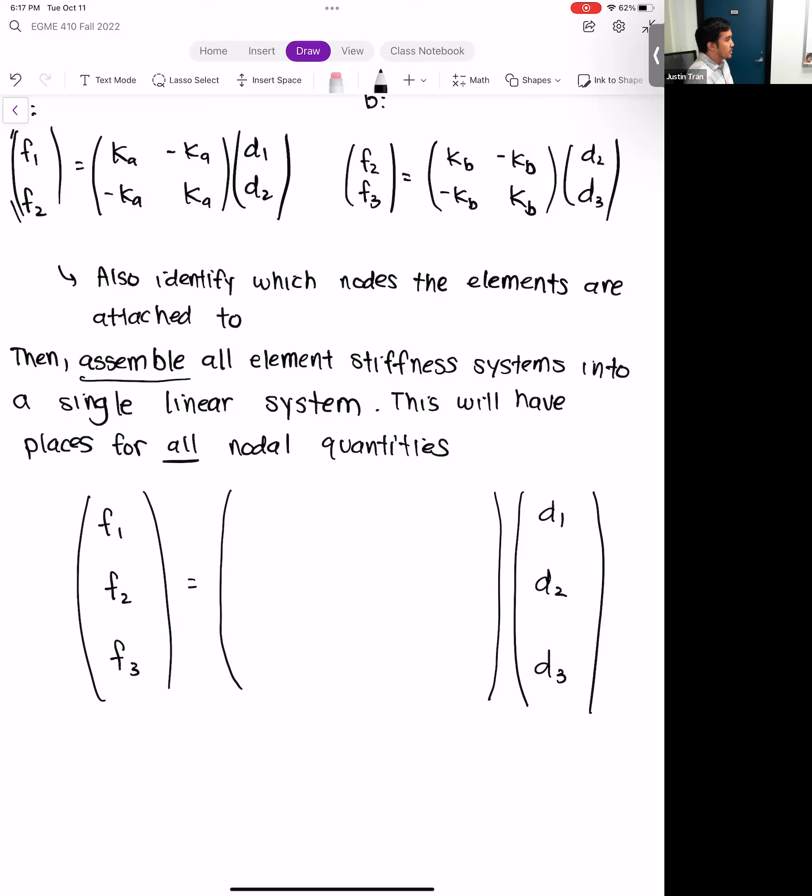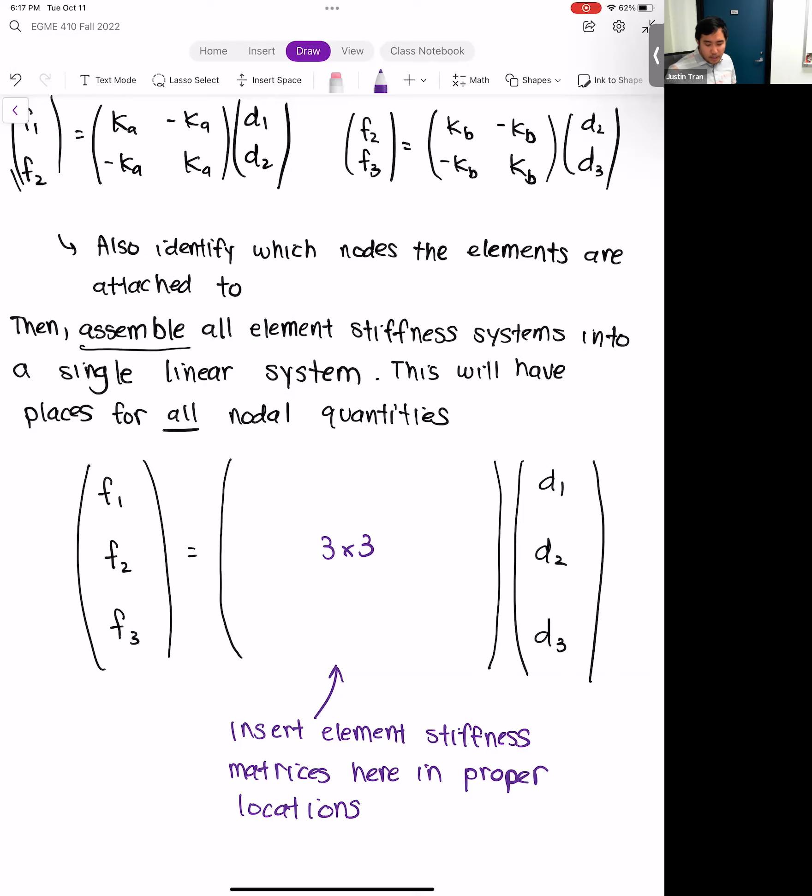Of course, the big gaping gap right there is what's happening in between, which you can see here is a 3x3 matrix. What we're going to do is insert all of the element stiffness matrices into this global system, in their proper locations. If you look at the element stiffness matrices for elements A and B, we can see that they're only 2x2 matrices, so of course they're not going to take up the entire 3x3 space. The key here is going to be to make sure that you put the element stiffness matrices in its proper place.

Any questions on this so far? Okay.

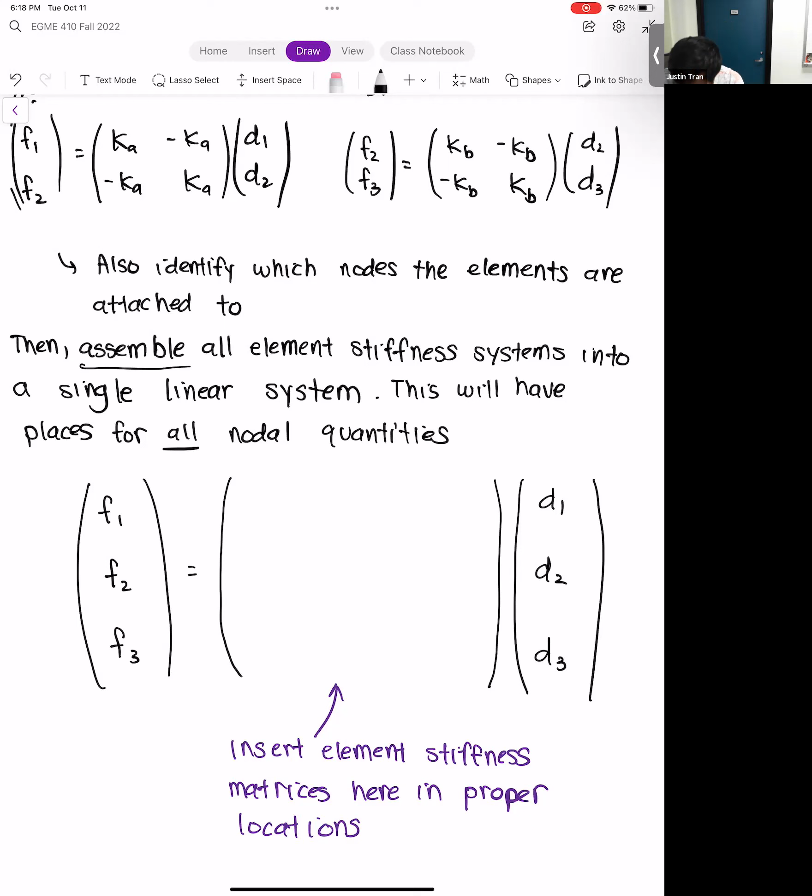All right, so how do we put the element stiffness matrices in the right locations? I'm going to make an additional change to help with that. We've already labeled the rows: the first row is D1, the second row is D2, the third row is D3. I'm going to label the columns as well. Our first column is D1, our second column is D2, and our third column is D3.

I'm going to do the same thing for our element systems, using red since I'm coming back here. Element systems also have rows and columns associated with them. For the element stiffness matrix for element A, the first column is D1, the second column is D2, and for element B, we have D2 and D3. When you label the columns like this, the assembly becomes fairly straightforward. All we're basically doing is matching the exact same coordinates for D1, D2, and D3 for each of the element stiffness matrices.

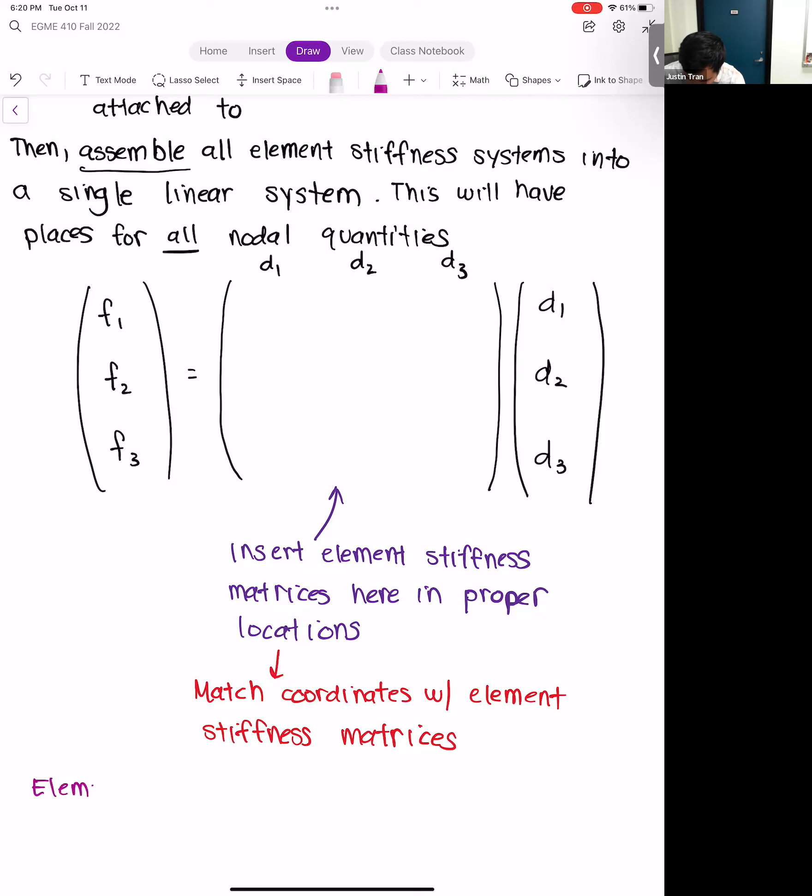So let's see what that looks like. Let me start with element A. You know that element A acts on nodes 1 and 2, so that's going to be on the D1, D2 row and the D1, D2 column. So it's going to look like this: inside that dotted box, those are the entries of element A. Let's put that in. Element A's element stiffness matrix is Ka, minus Ka, minus Ka, and Ka.

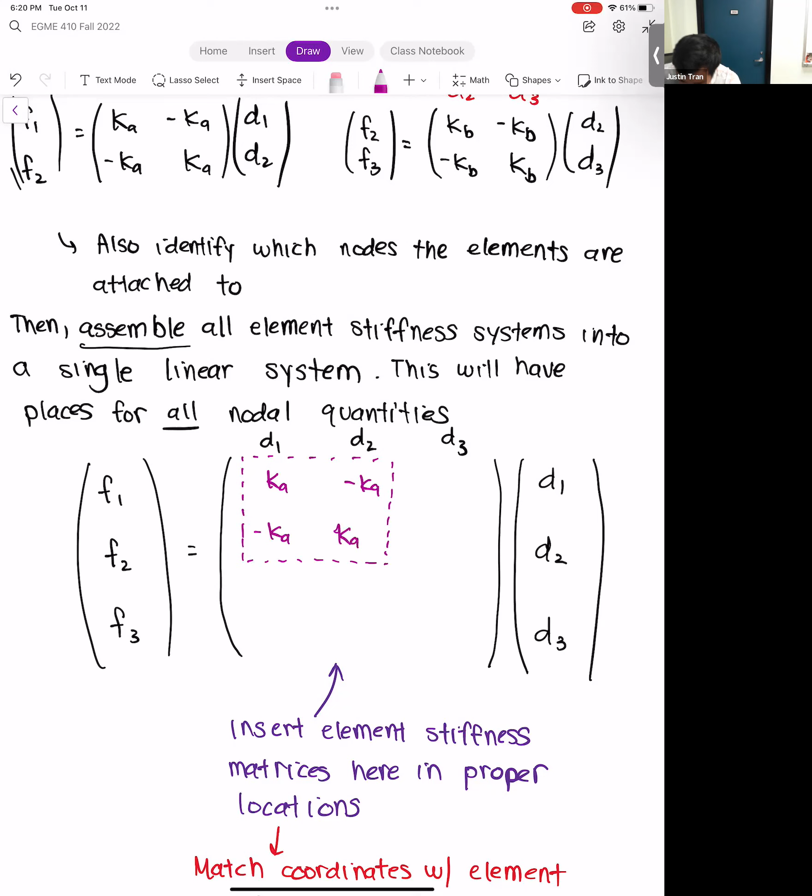Next we have element B. Element B we know is nodes 2 and 3. So in the global system, that means it's going to be on the D2 row, D2 column, and D3 row and D3 column. If we draw a dotted box, it looks something like this: we have minus KB, minus KB, KB.

And of course we have an overlap, on that D2 spot. So you might be wondering, what happens when you have overlapping element stiffness matrices? Well, it's very simple - you just add whatever overlaps. In this case we have just one overlap on node 2, so in that 2,2 slot we're going to have Ka plus Kb.

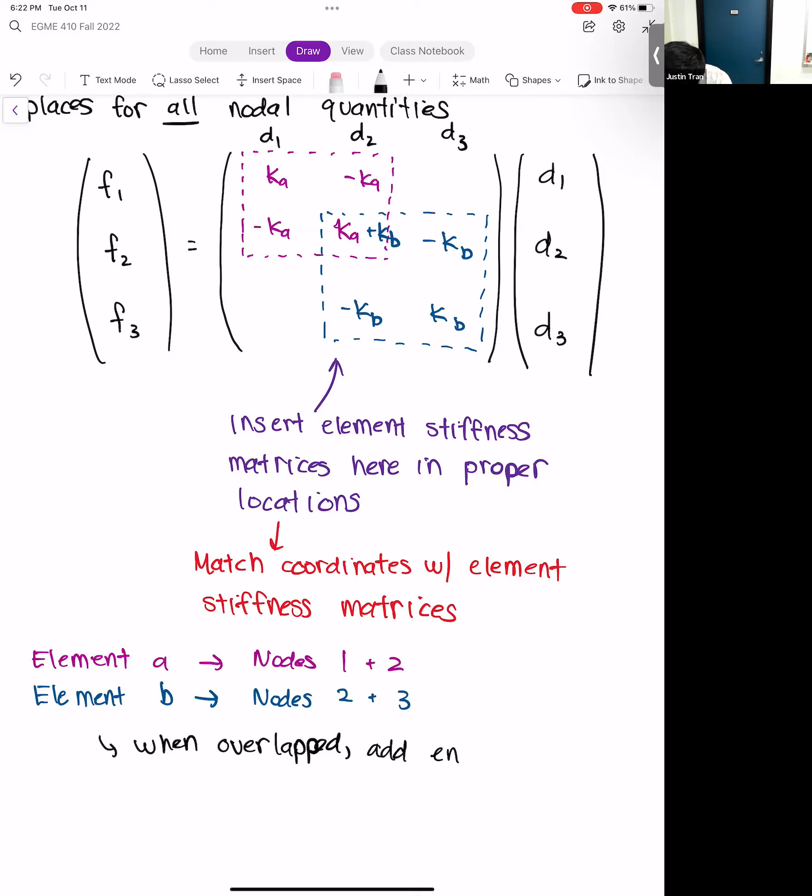And for anything that's not claimed, anything that's not within a box, we're just going to put 0. So we're going to have a 0 here and a 0 there.

Let me scroll up a little bit here. Right, you can see we've made some good progress. We started with our element stiffness matrices, and we've assembled them into this global system. This is kind of where we're at. Remember what I mentioned at the beginning: FEA is a way to take a differential equation and turn it into an algebra problem. Obviously we're not starting with the differential equation here - that would be a whole other class - but you can see here that we have an algebra problem.

We have it in matrix form, of course, but we have a system of 3 equations, F1, F2, F3, and 3 unknowns, which is D1, D2, D3. So we have exactly the number of equations that we need to solve for the unknowns - 3 equations, 3 unknowns. We've kind of accomplished what we set out to do, which is to get an algebra problem out of this physical problem.

Any questions on what we've done so far? Okay, all right, so this is looking good.

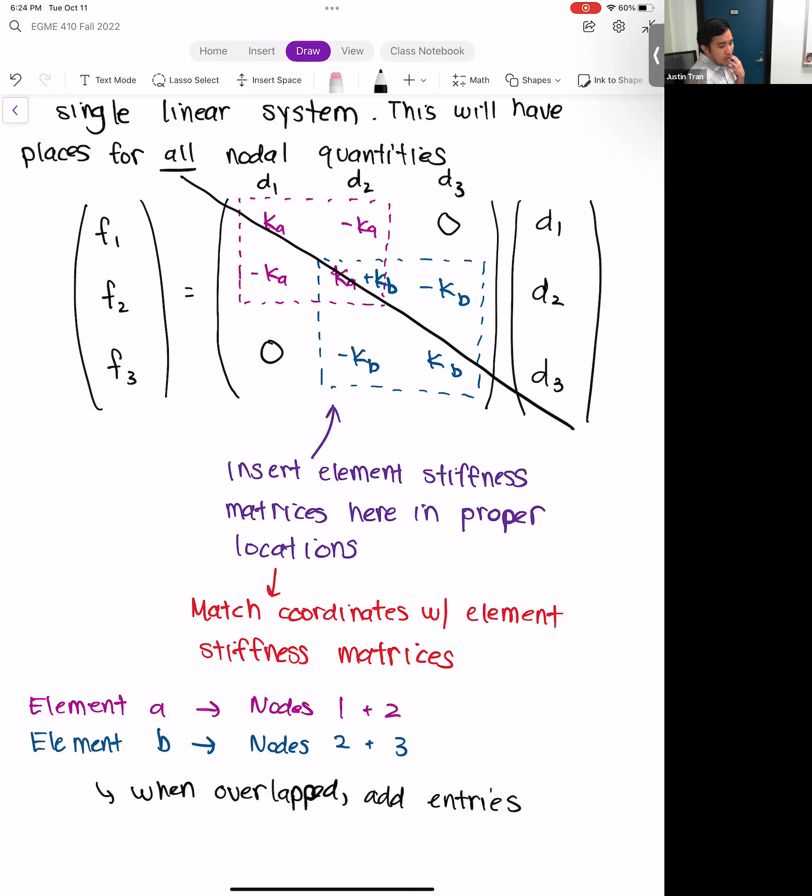Okay. So remember, boundary conditions are basically all of the external effects that are acting on our system that are affecting the solution.

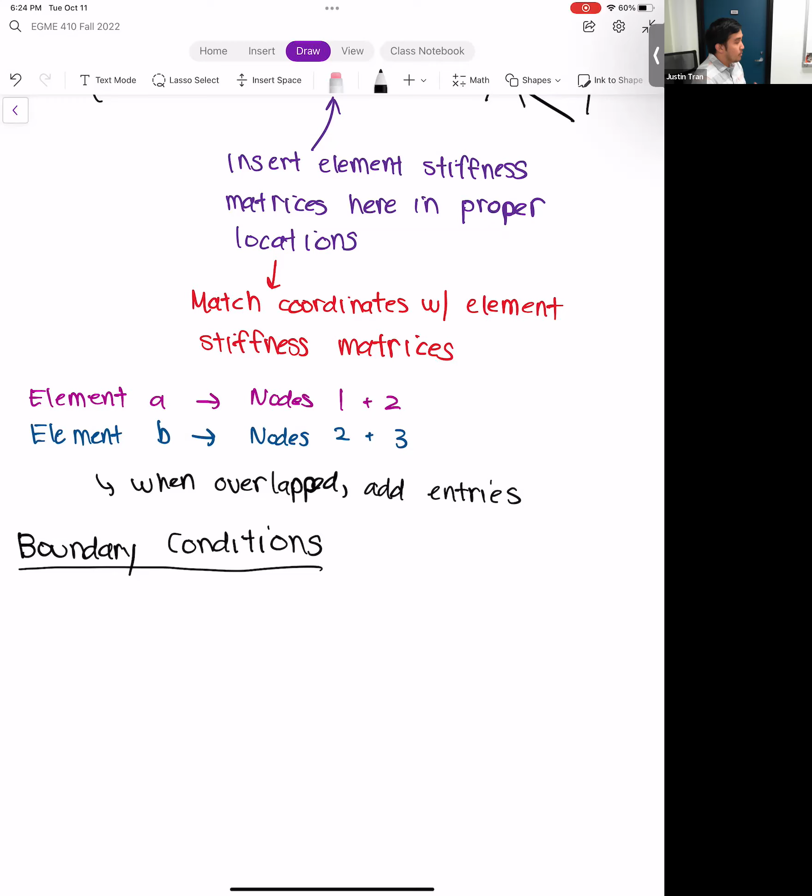If we look at the figure for this problem, we actually have two external effects. The most obvious one is on the right, where we have an external force. Another way we can say this is that it's a load.

So to keep our terminology consistent with when we talk about boundary conditions in ANSYS, that's going to be our load type boundary condition.

And then our other boundary condition is actually on the left. Our other external effect here is a wall, and what the wall is going to do is constrain our system. So this right here is our constraint.

So we have one load and one constraint. It looks like a very typical finite element problem. The next step is to actually see how to mathematically represent this load and this constraint into the boundary conditions.

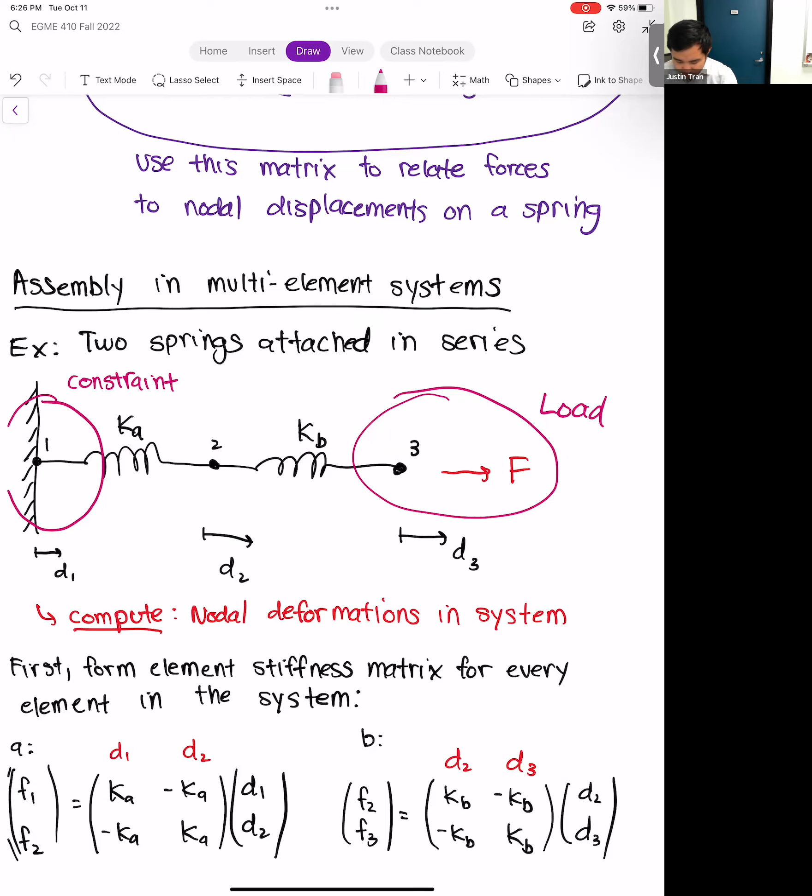So let me first start by saying that mathematically, loads and constraints are handled differently in the global system. Kind of exactly how we think about them differently in ANSYS, they actually are handled very differently mathematically.

So we're going to talk about how to handle load type boundary conditions. We'll do that second. First, we're going to learn how to handle constraint type boundary conditions, and then load type boundary conditions.

Oh, I need to sleep more. Okay.

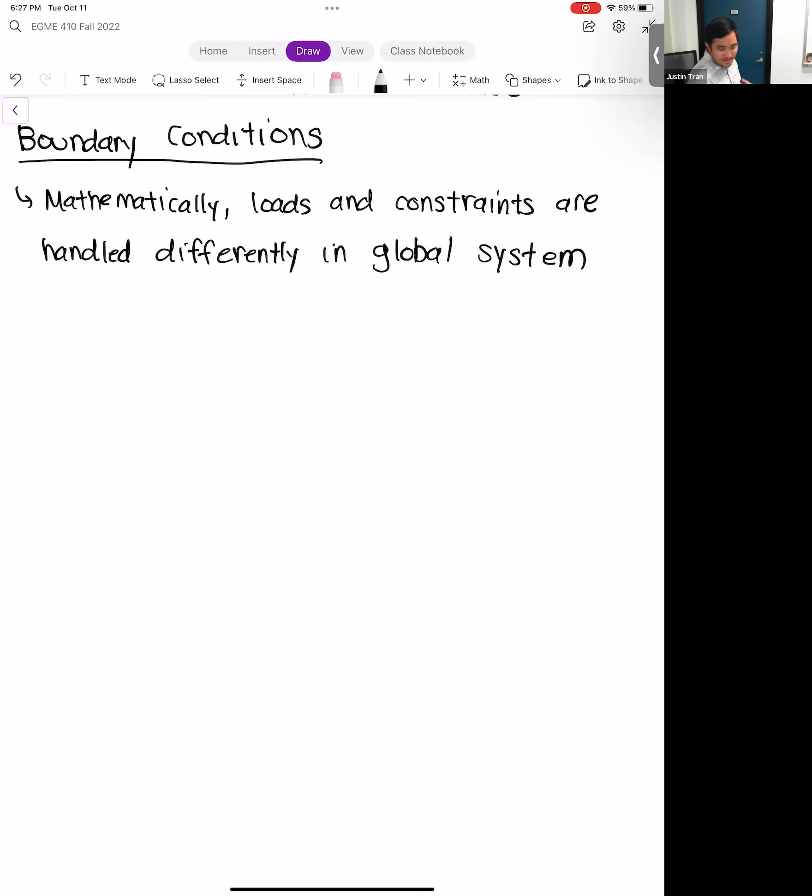And so let's look at constraints first. What do we know about constraints? Think back to our boundary condition lecture from a few weeks ago. What we know about constraints is that they directly specify the solution variables at their location.

So to see how this is applied here, we have to ask ourselves, what's the solution variable? That's kind of the key. And the solution variable for our spring system is going to be the displacement.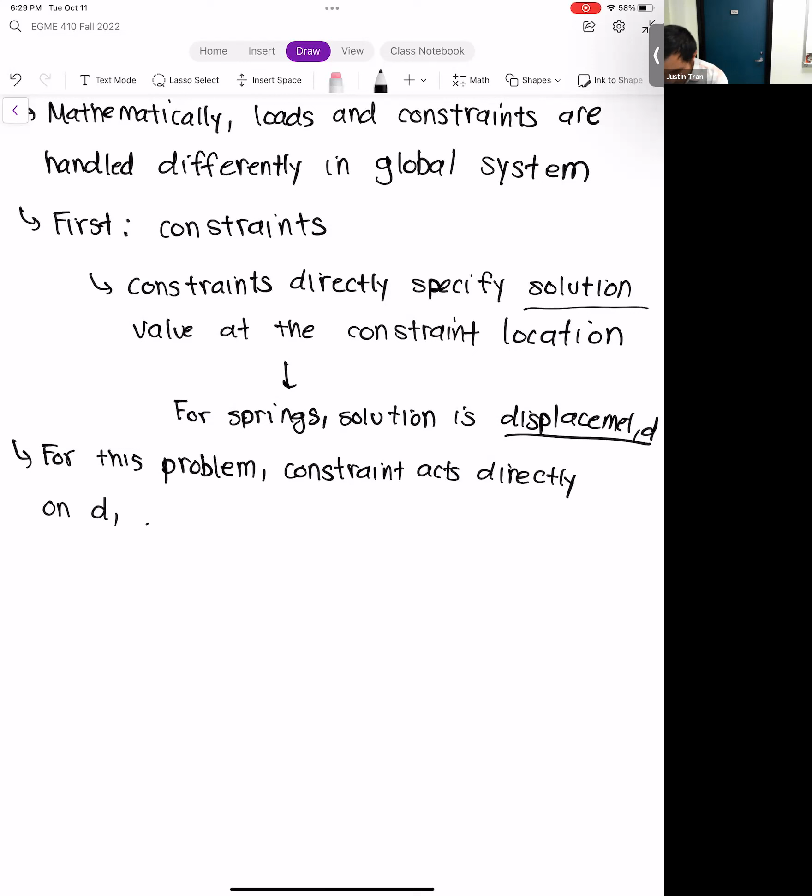In other words, we're going to directly specify what the displacement should be at D1. The simplest way we can do this is we can just make an equation. We can say that D1 is equal to something.

In particular, and this isn't always the case but it is most of the time, what we have here is a fixed constraint or a fixed support. What we know for a fixed support is that the displacement or deformation at the fixed support is going to be 0. So mathematically, we can represent that as D1 is equal to 0.

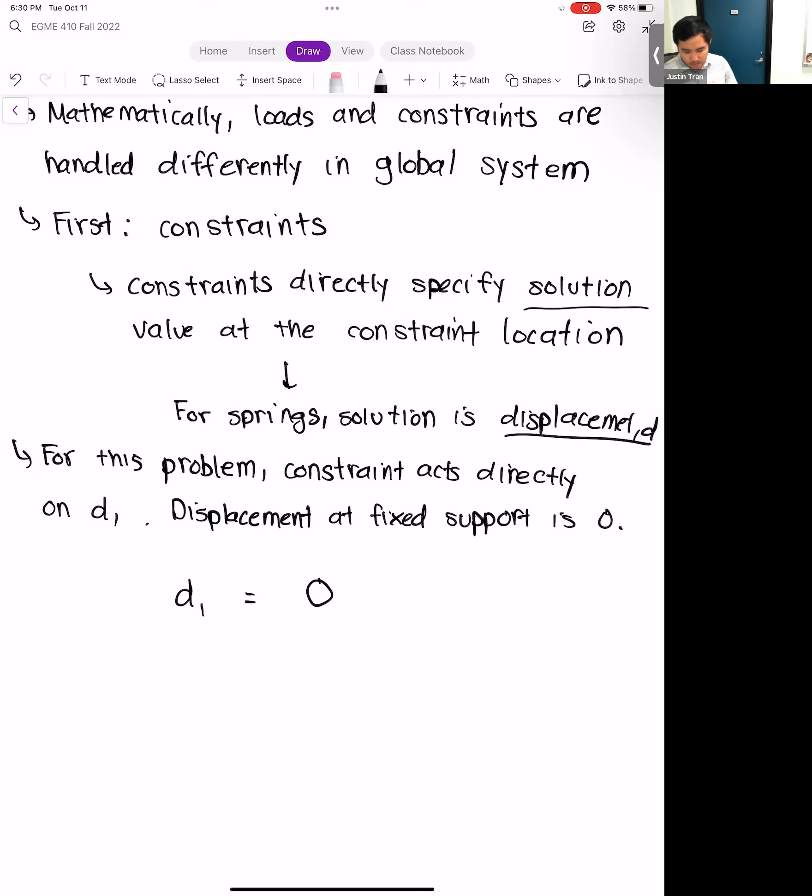Right, so very, very straightforward. For constraints, we just set the displacement or relative displacement equal to whatever they need to be. I'm going to take this very simple equation and make it weird. So let me do this.

So the first equation there, D1 is equal to 0. What I can say here is that this is equivalent to D1 plus 0 times D2 plus 0 times D3 is equal to 0.

You might be asking why I'm doing this, because normally when you multiply something by 0, it just goes away, which is why we have that equation above. But the reason I'm doing this is so that we can fit this into our global linear system.

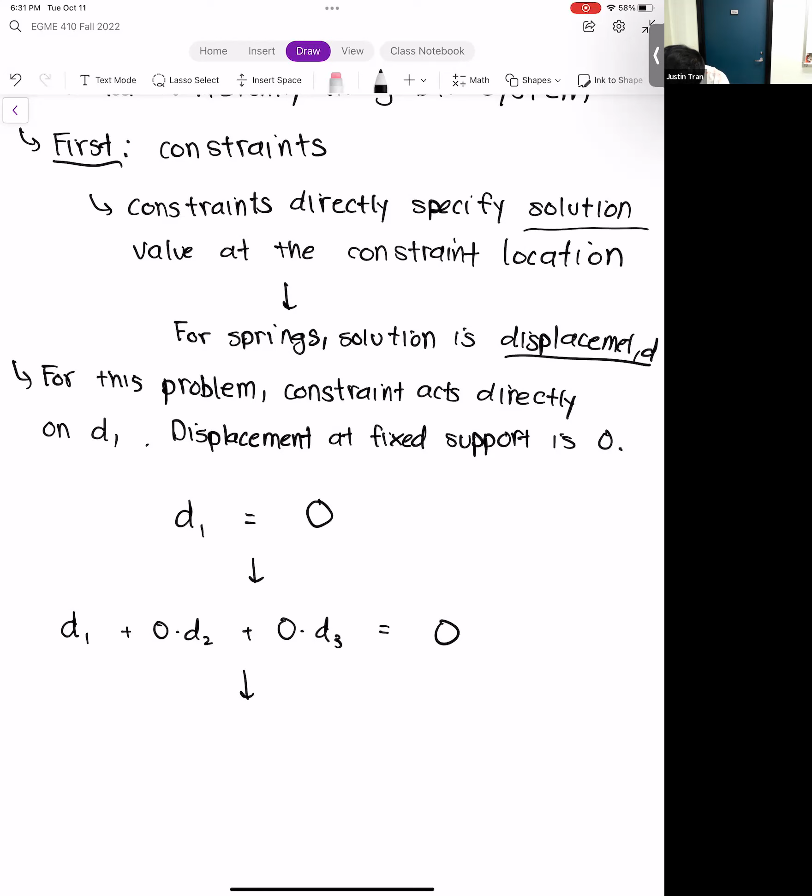So I'm going to extract this even more. Let me go ahead and extract the coefficients. We put this in, well in this case, vector form -- we don't have quite a matrix yet. If I extract the coefficients, we can say this equation is equivalent to the row vector 1, 0, 0, multiplied by the column vector D1, D2, D3, and that is equal to 0.

If you perform the matrix multiplication or vector multiplication here, you'll see that this relationship is legit. Hopefully you can see the reason I'm doing this -- it's so that we can fit this into our system here.

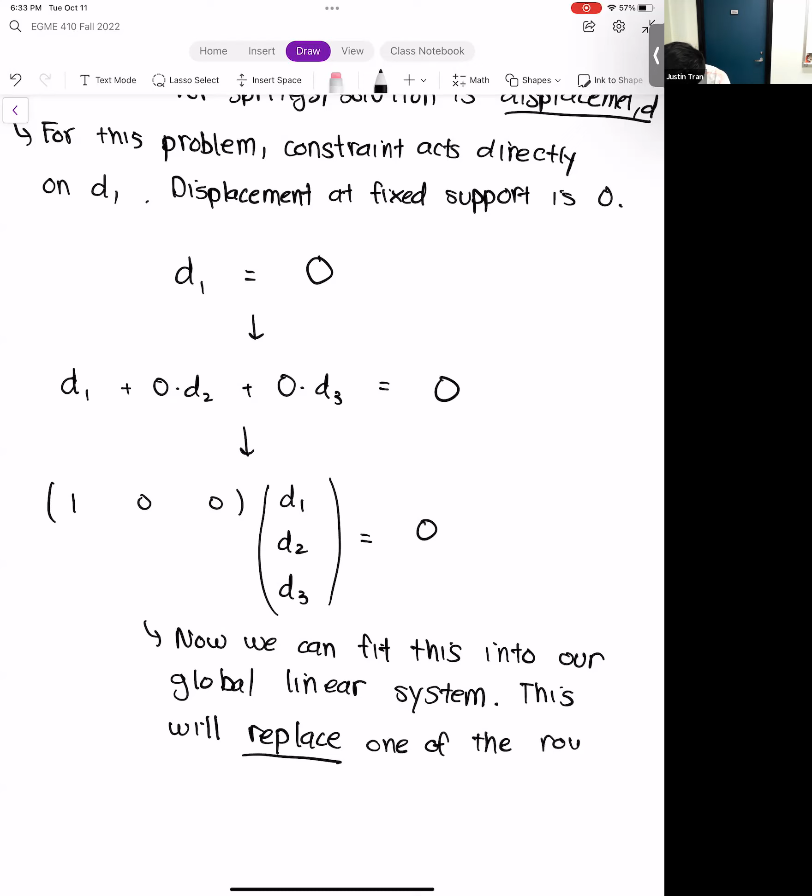So let me show you what I mean. Let me go ahead and draw the global linear system again. So we have F1, F2, F3, and then the stiffness matrix here: Ka minus Ka, 0; minus Ka, Ka plus Kb, minus Kb; 0, minus Kb, Kb. Then D1, D2, D3. All I did was repeat the global linear system that we had above.

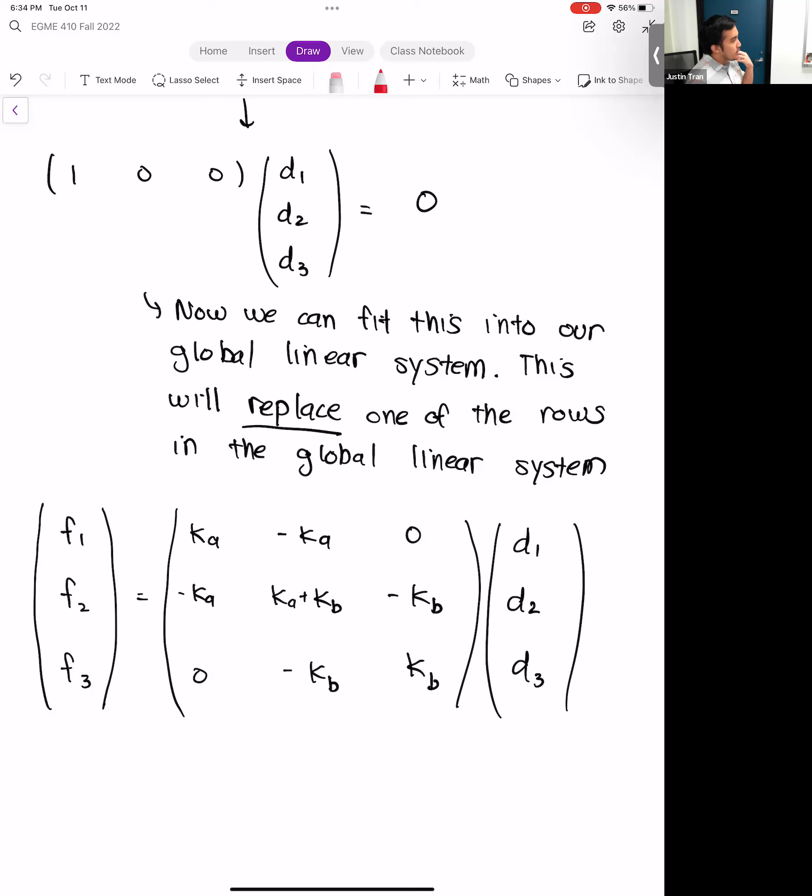So what we can do is we can replace one entire row here with the system that we had above. In particular, since this constraint is acting on node 1, let's replace row 1 of this linear system with that constraint equation.

And again, node 1. All right, so row 1 is this row right here, more specifically this row right here. Let's replace this row with our constraint. We can see that in the matrix portion here it's going to be 1, 0, 0, and then on the right-hand side of the equation we have a 0.

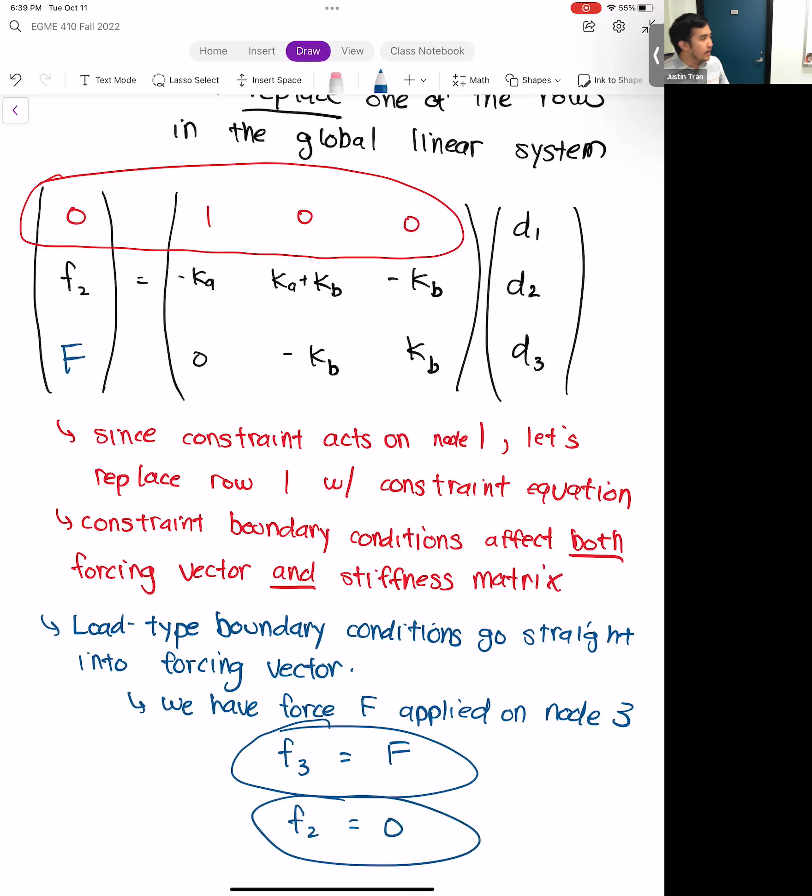And the last thing that we'll do is we note from our diagram here that we have no load applied on node 2, and we have no constraint there either. So mathematically what we say is that the external force on node 2, little f2, is going to be equal to 0, and so we can put a 0 there as well.

All right, and so what we've done in this step is we've taken our global linear system, the one that we've assembled before, and we've applied boundary conditions. The benefit now is that if you look at our matrix here, it's no longer singular, and so this matrix can actually be solved. Now we actually have an algebra problem we can solve - three equations, three unknowns, a non-singular system. We're good, and so we're able to solve this.

And so this is the part where you look at this and say, just do the algebra, bro. And of course algebra is a lot harder than that. If I told you to solve this, you'd probably be angry with me. It's not the hardest one - it's three equations, but we're going to look at systems in the coming weeks that are like 12 by 12 or 20 by 20. So 12 equations, 12 unknowns, 20 equations, 20 unknowns - for a computer that's actually a piece of cake. But if you try to do it by hand, you're probably going to want to murder the person telling you to do that. So, algebra, we'll see.

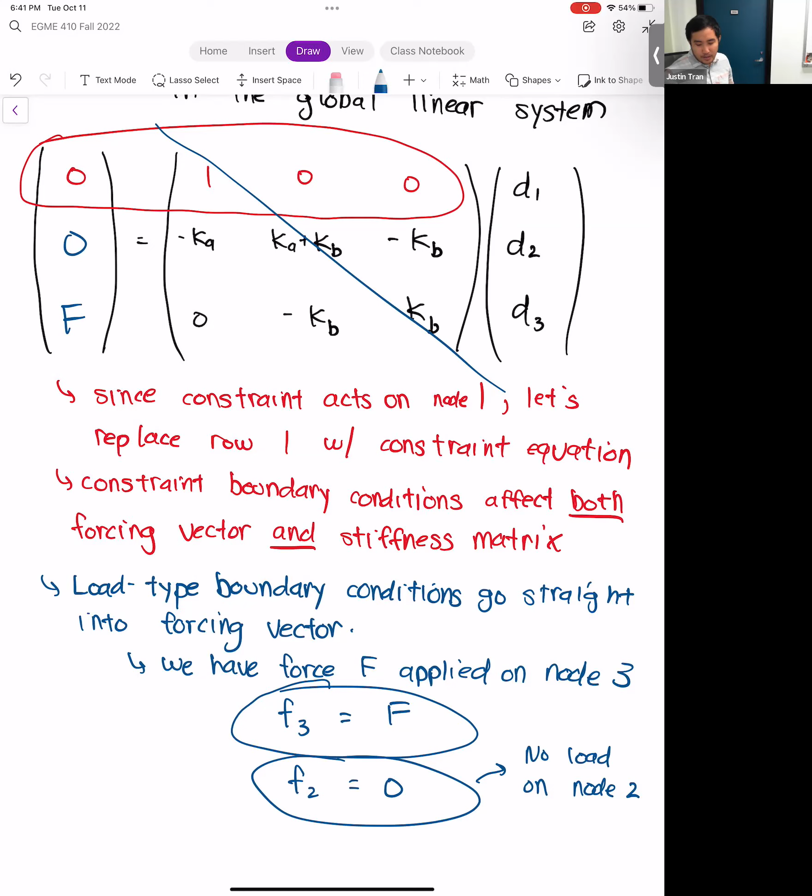So what you saw today was kind of the finite element process. We went from a system with elements, which is our mesh. We formed the element stiffness matrices for each of the elements, assembled them into a single global linear system, and applied boundary conditions. Now we're in a position where we just have to solve the algebra problem.

So here it's purely math, and it's math that a computer happens to be really good at. Any questions on any of this? Okay, all right, and that's it for today.

On Thursday, we're going to do an example front to back. We're going to do this entire process again, but with numbers, so you actually get to see it illustrated. I think that example will be fun because you can basically see what ANSYS is doing underneath the hood. I don't think it's going to take the entire time, I'm hoping it'll only take about 30 minutes, and then we'll probably spend the rest of the time, 45 minutes, working on activity 4.